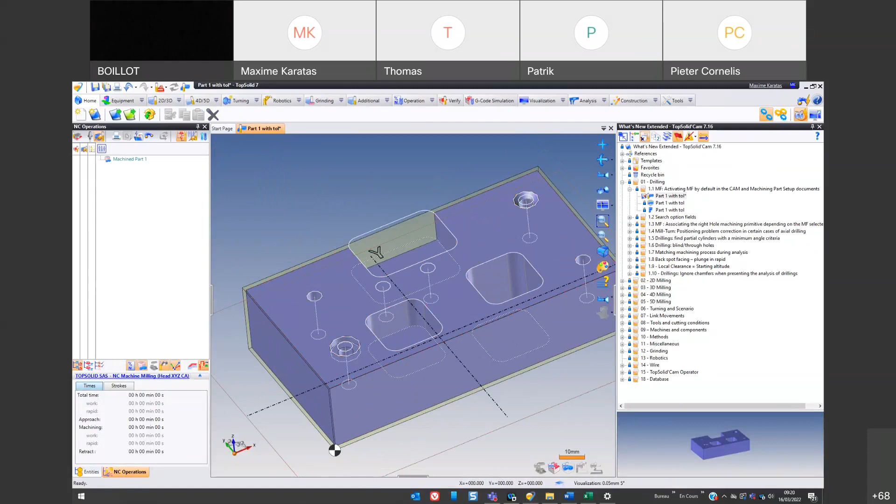Okay, let's go next. Search option field. Okay, so very simple.

You can now define the default search options in the drillings. You go to tools here, options, drillings. I was there yesterday, as you can see. And here you can choose which search option will be activated by default.

Just in case the question pops up, I can't remember if we included this here. I don't believe it, I don't think so. Trailing analysis, no, we don't have it here. So yeah, it's only in the options here in tool options. Simple as that.

Next one, there we go. A manufacturing feature and drillings associating the right hole machining primitive depending on the MF selected part. Okay, so what is this about?

It's very simple. Let's go to this example 1.3 here. Okay, and what are we trying? When you select one of the MF from 7.16, when you do this, okay, so maybe I need to be a bit more attentive.

Okay, when you select the right MF here directly, and you choose drilling and hole machining, the right primitive should be associated instantly, which is not the case here. Let's try this one here, drillings, hole machining. Okay, so you see I selected the spot facing and I don't have to select it anymore. The drilling primitive will include it automatically.

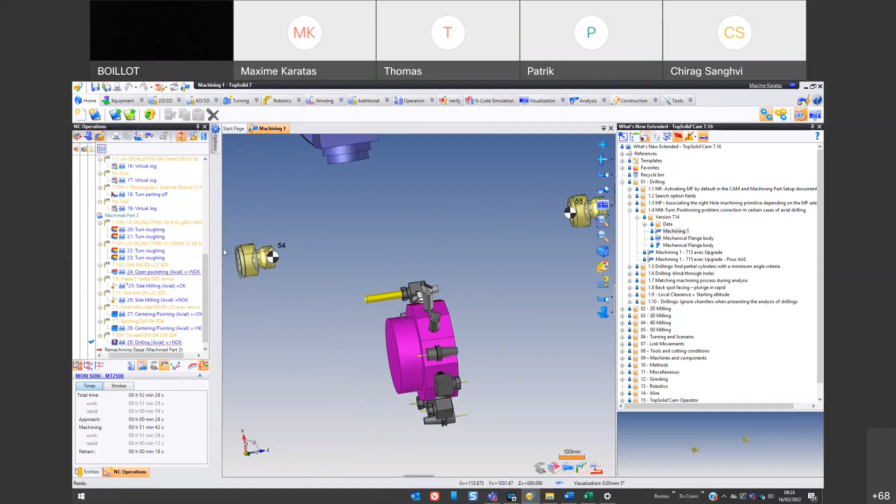Here, let's show this, we have a 7.14 example here. So when you had mill-turn machines, or for example, turrets working on the bottom side of the axis, sometimes working with drillings, or I don't know, like a G12 or something like that, sometimes the simulation will display the axis working on the other side, which would result in problems. For example, here we have this open pocketing, I believe on this turret. So let's simulate and you will see.

Let's go. Okay, here we have this, and this is the top turret, and we are actually trying to work under the axis, which is not optimal. Ideally, we would like to work here, right? Makes a bit more sense.

Technically this has been patched, and there were some cases for drillings where this wouldn't still be the case even in 7.15. So we just upgraded that algorithm, so you shouldn't get this problem anymore. For example here, so I believe this one was patched. Simulate, okay.

So you would get this behavior by default, and now this is patched. So this is the default behavior, and you don't have to put the option in the shift angle in the multi-axis settings. I believe it's somewhere.

Okay, let's just check it out. So here, and shift angle. So technically, I didn't check it out, but on 7.14, you should have had to put a 180 angle here to get the right result. This is no more the case. Now, if we're using a top turret, we are working on the top side of the axis. Simple as this, next.

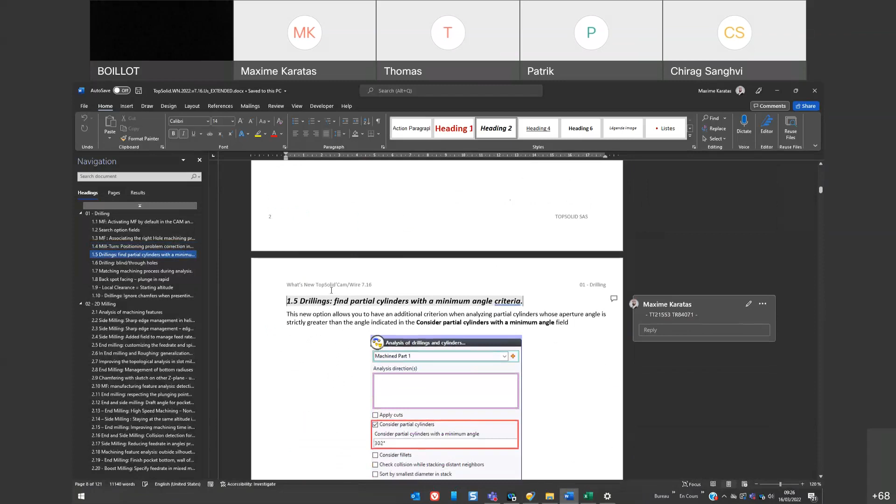This one was tagged as an important point from product management. Let's take a quick look at what it is about. So we are now about to filter partial cylinders with a minimum angle criteria in the analysis of drillings and cylinders. How does this work? Very simple, we just start an analysis of drillings and cylinders here.

Okay, thank you TopSolid. And in there, in the options, you can ask to filter and consider partial cylinders above a certain angle. So for example, if we put 250 here and then redo the search of drilling, and I select everything, you will see that...

Every angle under 250 will be excluded. So let's try it out here. We have 270. So if we put, for example, 280, again search, and you see these ones have been excluded. So it makes it a bit easier to apply certain kinds of methods and stuff on these partial cylinders and all. Simple as this.

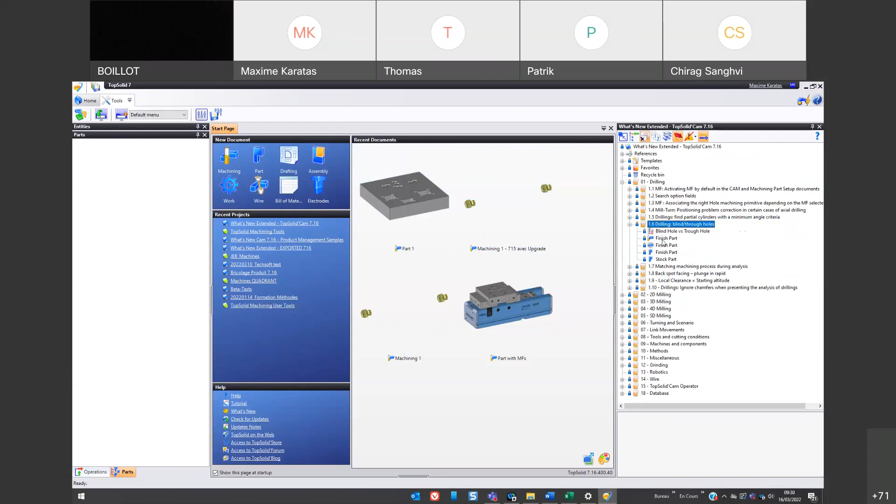Next one. Okay, a new filter option, call it like you want, about how we consider blind and through holes. So we added a new parameter in the options of analysis. Let's check it out. If we go to options in the CAM analysis here, we have this new checkbox here called check blind hole as through hole.

And what it does is that, when doing the analysis of cylinders, for holes that are through, if you have some material here, TopSolid would consider them as blind in the past, or in any case. If you have material here, it is considered as blind. We introduced this parameter here so that you can decide from which amount of space you want between the end of your cylinder and the bottom of the next face, to consider that this cylinder is actually through.

So if we put 20 millimeters here, for example, and we start an analysis of cylinder, we take this one here, I click drilling, hole machining, you see you get over depth 0 here, so it is considered as blind. And if we take the last example here, hole machining, you get through hole over depth, which will be different. Okay, so think of it.

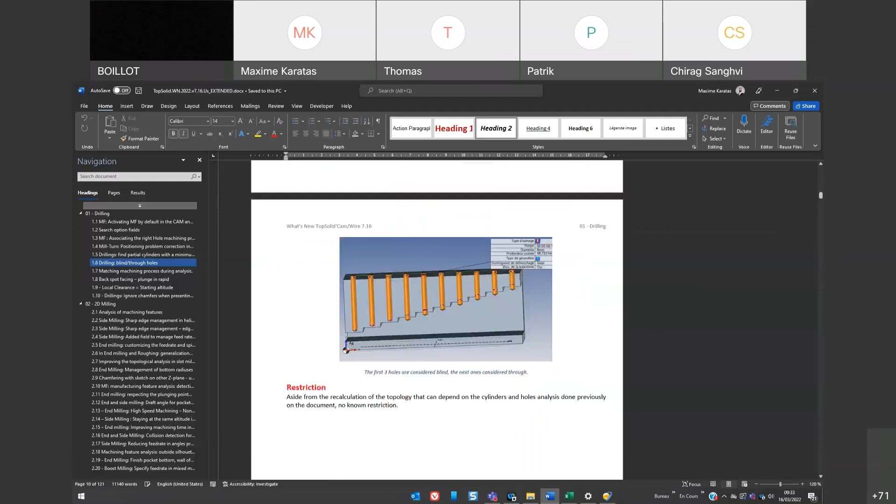So let's proceed. 1.7, matching the machining process during analysis. So what is this about? So the thing is, there we go. So now, again, a new option inside the options and analysis. We have this window or checkbox to take the machining process into the calculation, to consider the machining process. I don't like the translation, but it's fine.

Let's go here, CAM analysis. And we have, where is it? Here, take into account the machining process here. And we can keep it here, or we can put it in the options. So what is this about?

If you take a quick look here on the part, we have 4 cylinders that look, geometrically and topologically speaking, the same. But if we take a look at the operations, you will see these drillings have been made differently. Here we have a drilling with the spot facing already done, here it's a drilling, same drilling here, then we add a hole here. So the way we create these holes is not exactly the same, so the process is different.

From now on, when you do this kind of analysis, we simply start the analysis of drilling and cylinders. So now instead of grouping these cylinders together, the different processes have been taken into account, meaning we consider all the processes. Since the color and the process are absolutely different, we separate them into 2 different groups of drillings, as you can see.

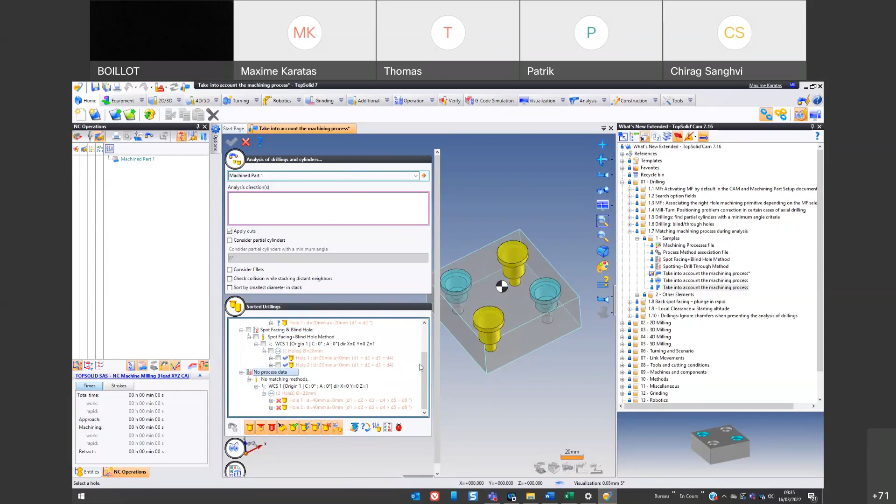Just a quick reminder how to do this. You have to use 2 different kinds of files. You have to use a machining process file, which is used during the CAD process, where you define 2 processes. Then you need a process and method association file, meaning from here you will have your process association, and you select which method is supposed to be applied inside the machining process. This is where you can define different things. I'll let you explore, but for now let's proceed, and if you have any questions, please give us feedback.

1.8, back spot facing plunge in rapid. Let's take a quick look, because simply put, we can now define if we want to use a rapid plunge inside a back spot facing. This one here is a good example, let's show it. You can now go here, I believe it's in the parameters. So for the entry feed rate, you can now say you want to do it in rapid, and you'll see it changes instantly. Simple as this. Again, here, settings and parameters, you have both entry and exit feed rate, where you can choose which kind of feed you want to use.

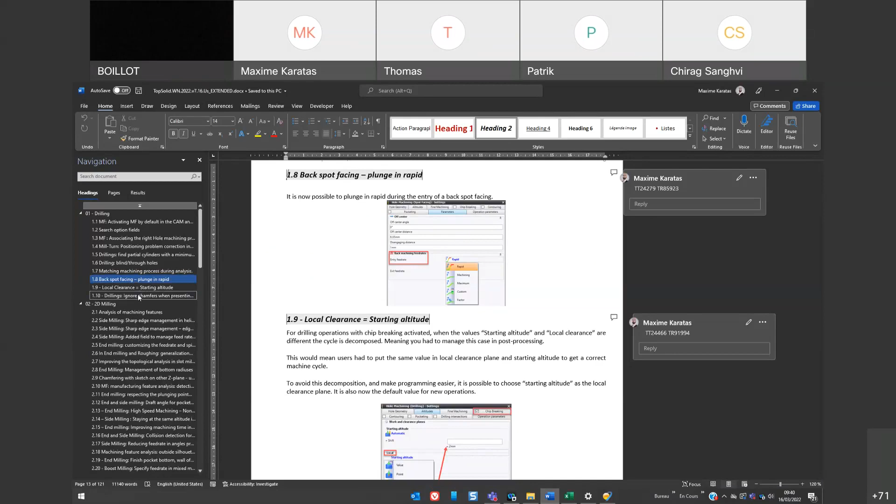1.10 drillings. We are now able to ignore the chamfers when presenting the analysis of drillings. Right click, analysis of drillings and cylinders, right click. So these cylinders, if you ignore the chamfers, they are all the same, but you can now request TopSolid to completely ignore the chamfers, etc. I tried this yesterday and had a problem, but let's go, inside the geometry you can ignore chamfers and fillets. Let's try it out. Not today, it seems, because I believe I did it before. This is the result you're supposed to get, but since the last patch we had some problems. I believe it's already issued as a fix, but you should be able to ignore chamfers and fillets and have everything grouped together. Let's proceed, and I'll make sure it's patched.

Next one, so we are done with drillings in general. If there's a quick question we can try, but let's switch to 2D millings.

Okay, let's go. 2D milling. So as you can see, we have a lot here. So let's try to not lose focus.

Analysis of machining features. Let's go. So simply put, we have 2 new filters that have been added. Let's take a quick example here. For very complex parts such as this one, right click. Okay, not sure why it's so slow this morning. No, absolutely not. Okay, so let him do these things.

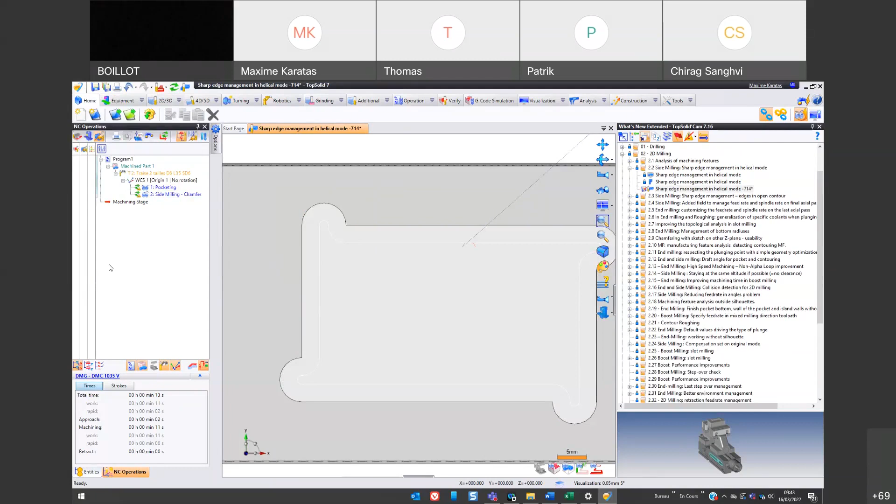Okay, if you now upgrade to 7.16, okay, so you see that we need to recalculate, Control E, there we go. And in this case here, for chamfers, we now get a good result, okay, which is literally breaking the edge, okay. And just as a reminder, it is in the angle management, and here you can ask what you want to do exactly.

Okay, clear, I believe. And I even sent some extreme cases I found myself, and they are all patched. So if you find more cases where this wouldn't work, okay, so remember when doing contouring and breaking angle in helical mode only, so it's not in the general mode, here you would get some strange behaviors. Okay, next then.

Breaking edge in open contour, yes. So in previous versions, when you were doing some side milling and using, I believe this was, this primitive, so the contouring primitive, the most standard one, you wouldn't be able to break the edges at the entry or the lead-in of a profile. Okay, so this is now possible. Okay, and in the lead in out section, what was that?

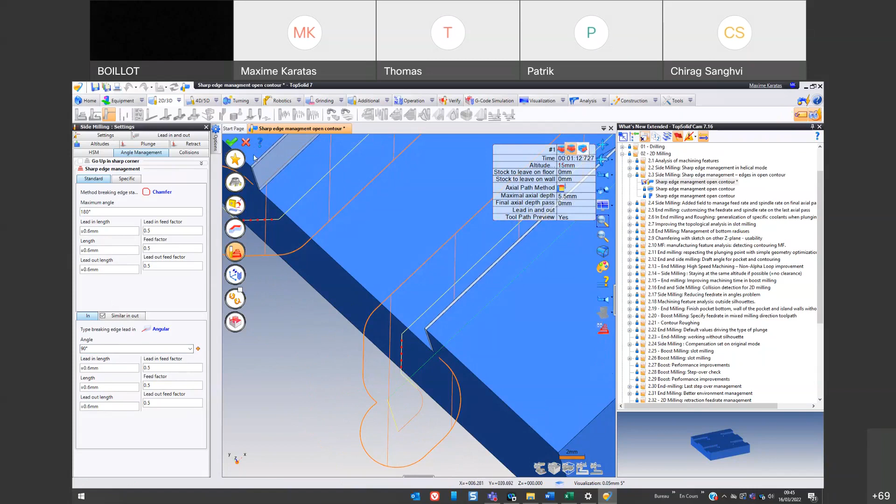Previously, this would work only with the truncated contouring, I believe. Okay, so now it has been generalized, and you can do it on all the profiles with only one cycle. So no more drawing sketches and stuff.

Okay, let me just take some notes here. Okay, so 2.4 and 2.5. So side milling added field to manage feed rate. Okay, so these are mostly the same thing, but let's check it out.

So now in pocketing and side milling, when you go here, so here it's the side milling example, we can manage the feed rate, or well, we can manage some things for the feed rate on the final pass. Here, so if you have a final axial depth pass here, you can also choose what you will do for the feed rate and the spindle rate here.

Let's open up this window, and of course you can choose between a specific, well, you can choose the machining, the same as the, yeah, well, you can choose the same feed as the rest of the machining, or you can use a custom one or a factor of the feed rate you specified in cutting conditions. Okay, same thing for the spindle rate, okay, custom one, tool factor, etc. Okay, so this has been done in side milling, and I believe this is the same thing in end milling.

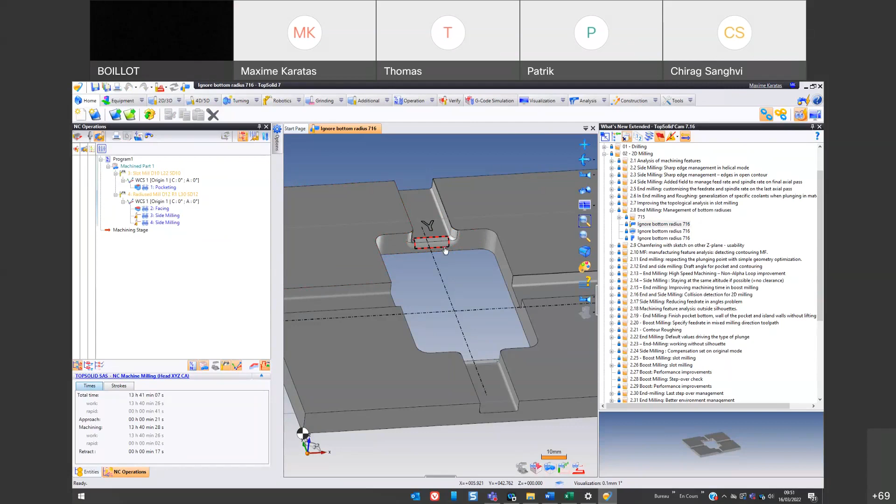In the past, if we wanted to ignore the bottom radius, it is in the settings here - ignore the bottom radius. When you would check this, in some cases the management of the finish shape would just break and not work at all. This has been patched. It is now working. You can now click this and get a correct machining.

This has been patched in any case - end milling, side milling, etc. This should work correctly from now on. Just play with it, and if you find cases where it looks like it's not working when it should, you can always send some stuff.

Yeah, I believe I made a screenshot on this. So 2.8, I believe. Yeah, here. So I made a screenshot. This was the kind of things you would get in 7.15.

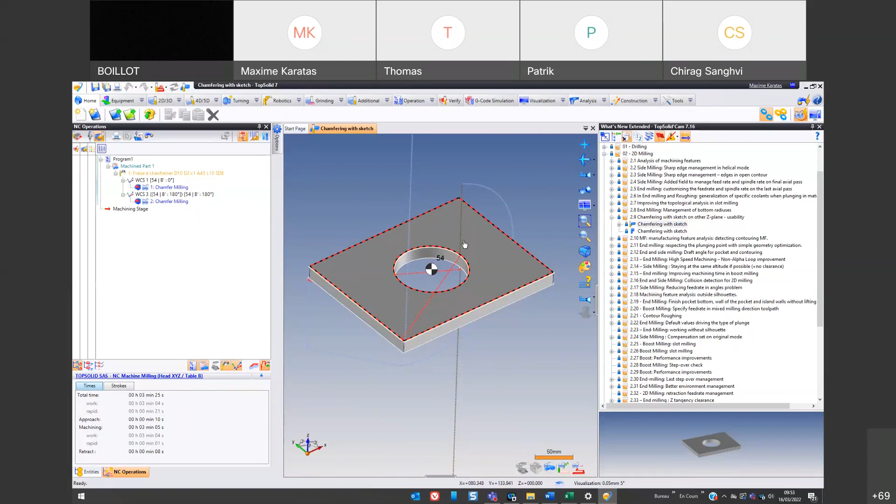Okay, I'm getting back to this. We changed the behavior of the chamfer milling. As you might already know, in the geometry, when using a sketch profile, you can change the altitude where you want to use the profile. You go on your geometry, then click on this range, and you can choose to which value you want to use the altitude of the sketch.

For the chamfer milling, what did I do? For chamfer milling, when using this on the bottom, this would lead to strange things, so this just wouldn't work. And when using a different work coordinate system - this is a very specific topic, but we patched it when using a different WCS.

You can now do this, and you don't have to tweak the positioning anymore. The positioning should work by itself. If you had cases where you would have to play with the position to adjust what was going on with the altitudes, from 7.16 you shouldn't have to do that anymore. If you don't know what I'm talking about, it is very likely you didn't get this case, so you won't get it anymore anyway. Okay, I'm moving on.

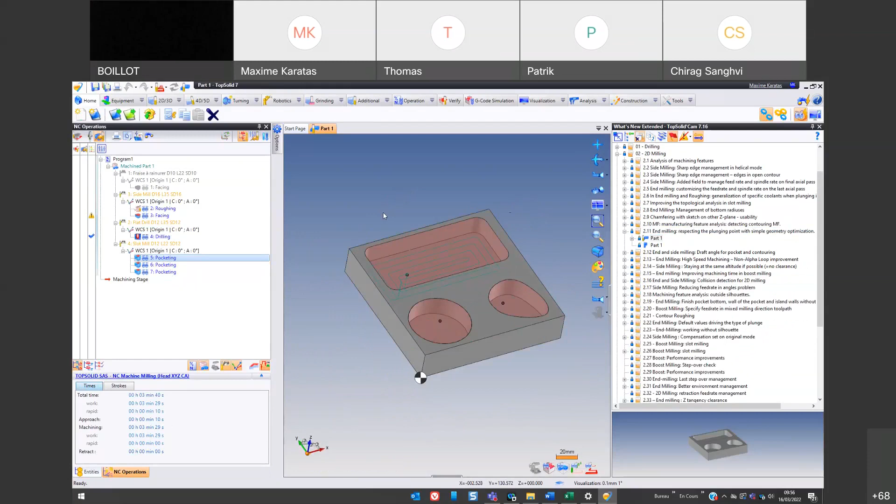So in some cases of pocketing, especially in 4-axis or stuff like that, when we used the simple geometry optimization - I believe it's in the strategy here - when you activate this, sometimes it would just break the plunging point you would choose. In the lead-in section or plunging point on your label, when using the simple geometry optimization, it would break everything and wouldn't use the point. From now on, the point will be respected: we plunge and then join the first point of the simple geometry optimization, so we try to reach the profile that was calculated. So this has been patched correctly. Let's proceed.

End and side milling draft angle for pocket and contouring. So, simple one. When you are in pocketing or side milling, this would work the same way. You will find here in the settings, for the stock to leave on wall, let's bring that up. You can now choose how you want to calculate the stock to leave on the wall shift: use a value or an angle. Let's put an angle, for example, 10 degrees. Let's confirm.

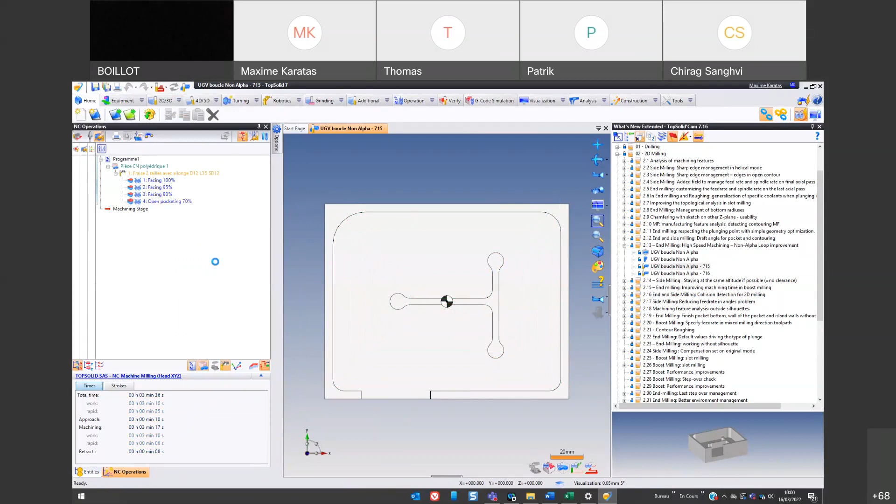Let's upgrade and rebuild, and we should get some improvement. As you can see here, the loops have been greatly improved. Instead of doing a complete loop, we can do this kind of corner correction here. So this will look a bit better from now on. We have a general better management of alpha loops in this version.

Let's not save this so we can keep the history.

Let's proceed. Side milling, staying at the same altitude if possible - the fact is, let's not do a clearance when switching passes. So what is it about? From now on, we are able to request TopSolid to stay more or less at the same altitude, meaning that we want to not do a clearance when switching from one pass to another.

See this little maximum feed rate move we have here - we can now request it in some of the cases. Plus we have options to filter the cases where you want to actually do a clearance. I believe it's in the HSM here, you need to request this first. And here you have to select a minimum length from which you actually want to go to the clearance. So here, 20 millimeters - if there is a distance greater than 20 millimeters from here to here, we get this clearance. Let's try to play with it for a second.

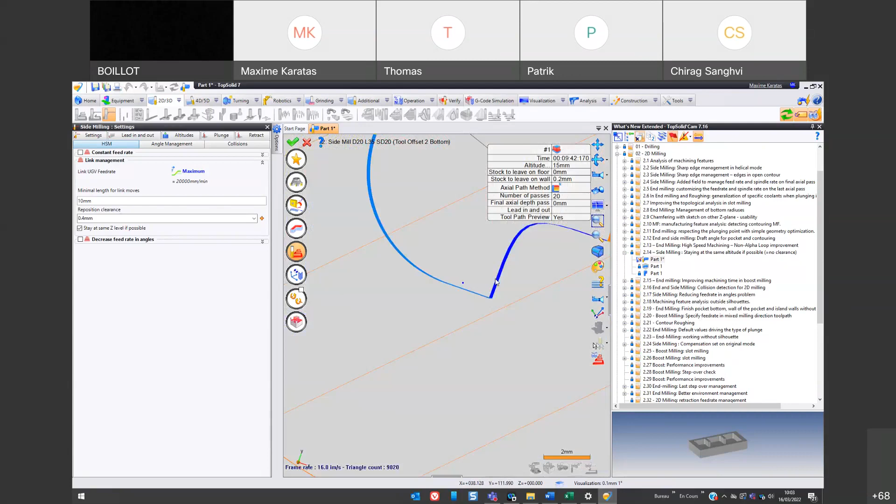Okay, so heard you for the maximal length instead of minimal. We'll try to discuss that. I believe this is what they use in French. As for changing this little movement here, it has absolutely no regard or anything to do with the link movement, but I will give you the trick to change that.

It is because in the settings, I believe it's here, in the compensation diameter, we use this offset to manage the case where we use the exact diameter of the tool. So if you actually get rid of this value here, there we go, you get this smooth toolpath. So from here, switch to maximum feed rate and go to the next pass, etc. This is because of the compensation movement we do here. So just get rid of a little epsilon here and you should get a very good result.

I believe this was written in the documentation. What was it? 2 point... I'm lost. 2.14, yeah, so that's it. Staying at the same altitude, and I believe, yeah, I did it here. So, okay, so think of it.

Let's proceed. Okay, so very simple one, no need to explain. Okay, 2.15.

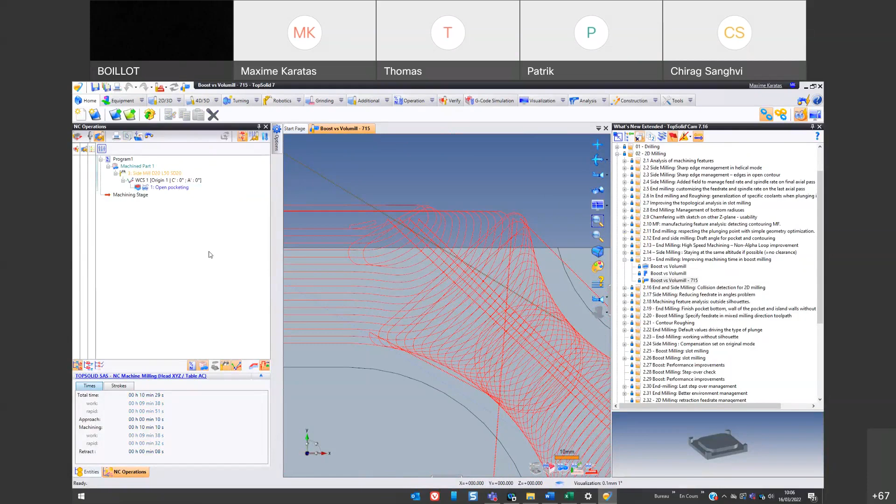So we just improved some performance of the boost algorithm compared to Volumill. I won't get too much into the detail of what was done - I'm not even sure I'm supposed to tell, but let's be fair: we improved the way we do transition links when, for example, using open pockets and stuff like that. Every transition link has been reworked, so you should get smoother results and, well, smaller results, meaning the cycle time should generally decrease. Okay, so nothing more to say, to be fair.

Okay, so here, let's close it. You can try it out. So if you have a boost you want to try, time to try it out and see if you get a performance improvement.

2.16, end and side milling collision detection for 2D milling. Okay, simply put, we are now able to request this in your cycle. So you see, if you do some pocketing without managing the tool holder, it is now possible to request it. And as you can see, we will use a diameter calculation for each path where we will change the way we offset the path, to take into account the fact that we are using a tool holder.

Okay, where is this? Double click on the pocket. Okay, we go to the settings. Why is it so slow? Am I in? I don't know what is going on. But it's okay, let's just wait. It's not supposed to be slow like that. Not sure if I am in energy saving mode or something.

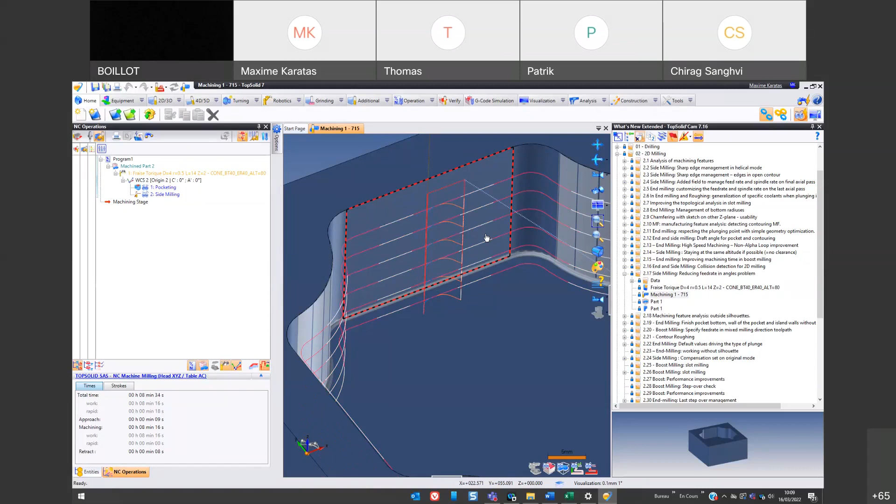I believe I made this kind of capture - well, I made a screenshot of this. Yeah. Okay. So you should get a better result. This also means, of course, that files with this decreased feed rate in lead in out will be modified.

So be careful with these. Okay, so I believe you might want to inform your customer sometimes.

Okay, 2.18, machining feature analysis outside silhouette, meaning what is going on? I believe that when you create or use... when you do machine feature analysis and you put an analysis direction, you should get one more.

You will get this outside feature - well, this isn't the right word, it's a contour, but you should get a new feature analyzed when you output a direction. This is the same manufacturing feature, it will work just the same as we did here. I believe it's a contouring MF.

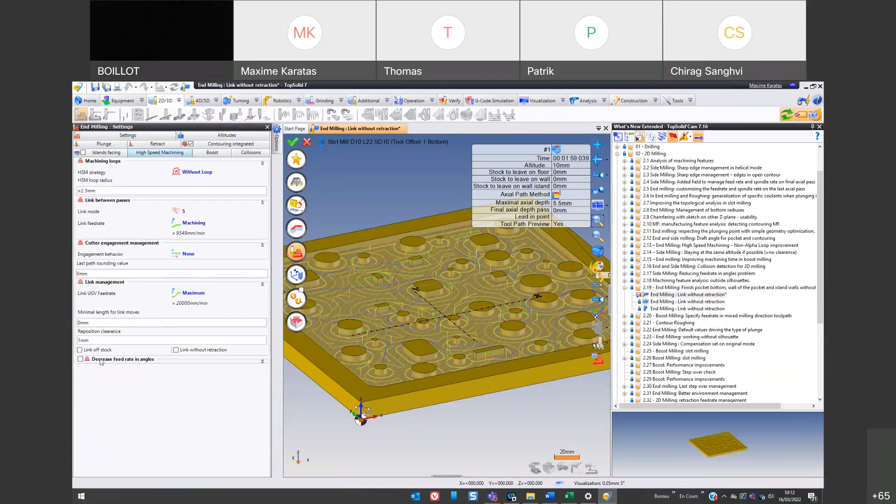Link without retraction. So, in pocketing and milling, when you finish your pocket, in some cases, with some materials, you don't want to lift the tool when you are at the bottom. So when going from a zone to another, you want to request TopSolid to stay at the bottom as much as possible. I believe it's in the settings, in high-speed machining. And here, if I request link without retraction, you can see this behavior: instead of doing a clearance from a part to another, TopSolid will stay at the bottom. So in some cases, it could be very important.

This feature will be combined with another one to help manage the case where you want to machine a zone and finish it at the same time, without lifting the tool. This can be very important for some kinds of plastics and also very precise electronics and stuff like that - this has been requested. We'll talk about it a bit more later because we use link without retraction plus a new option to do island contouring a bit later. So think of it if you don't want to lift your tool.

Boost milling, specify the feed rate in mixed milling direction. So what is this about? Simply put, when you use mixed directions - both conventional and climb - if you go into the strategy here, you can request to use the mixed milling direction. And when you do that...

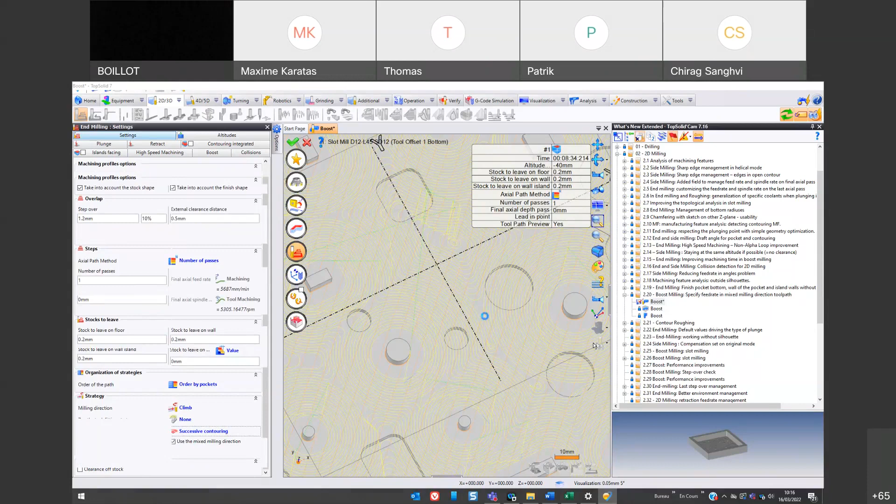That is a strange way to put an example - yeah, okay, I know, that is a strange way to put an example here without putting it in the boost. There we go, and yes, you are right, we are getting our parameter back. I will save this document like this so you don't end up making the same mistake as I did here.

Yes, I know. When you want TopSolid - okay, am I in energy saving mode? Just a second. Okay, what are you doing? Let me just change the energy mode because it's not normal, it's so slow this morning. Okay, fair enough, let's keep it like this.

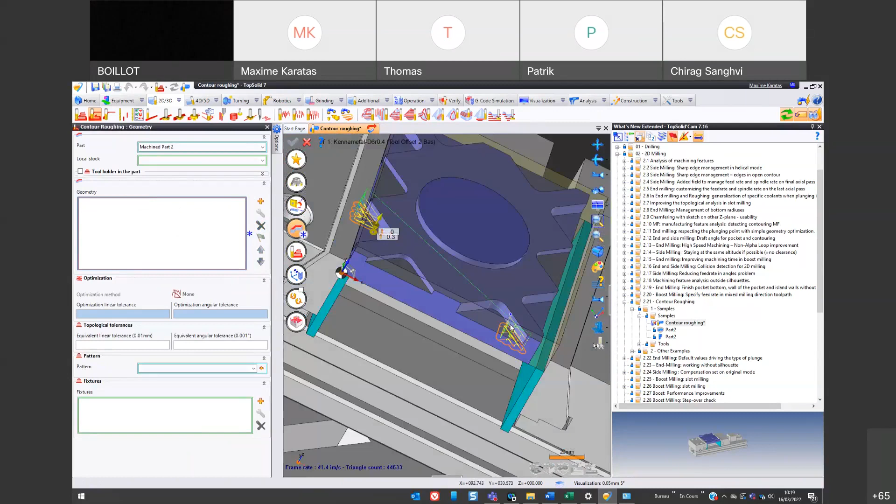This is what I call the demo effect. Alt again, and then going here, I don't know. Okay, so the Alt behavior should be working, not sure why it isn't here. Let me just try it out here, from here to, or I don't know.

This is why I'm trying it outside the operation. It should work inside too, this is why I believe. Better. Okay. So good, yeah it should. I know. Hasn't this been requested already?

Okay, so well, now it's your time to play with it, I believe. But basically it's the same as end milling. This has been tagged as important, as you might guess, since it is a new cycle. We made a complete video with translation that will be available on the e-learning platform, and it's also included in the package I sent yesterday.

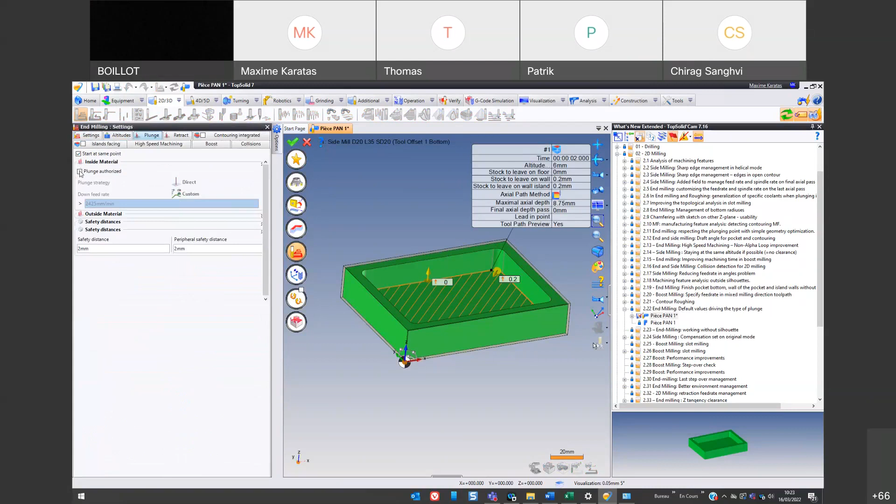So here, for example, I get a message: plunge is prohibited in the material. And since I'm using a side mill here, so double click, the user has to actually put the plunge here. So generally speaking, we improved the cases where the user wouldn't get why he's not getting any kind of toolpath. And here, of course, if we force the plunge with a tool that hasn't center cutting, we still get a message - we get toolpath, but we get a different message: the plunge has been allowed with a tool without center cutting. Yes, this will avoid support a lot, a lot.

Okay, so next one is a bit of an odd one. We don't have any example on this because the example here was confidential. So what is it about? We are not able to request TopSolid to work without using the silhouette. You know, the silhouette is the outside curve you get when you start a new cycle.

You get this orange cycle here, the silhouette. Let's put it there just in case some of you aren't sure. So this is the silhouette, okay, this orange thingy we get here. So for a very specific case, we allowed the fact that we can work without the silhouette. But let's be fair, okay - you have to be very sure what you are doing when you activate this option. This is for very specific needs, because yeah, we have a set of instructions to use.

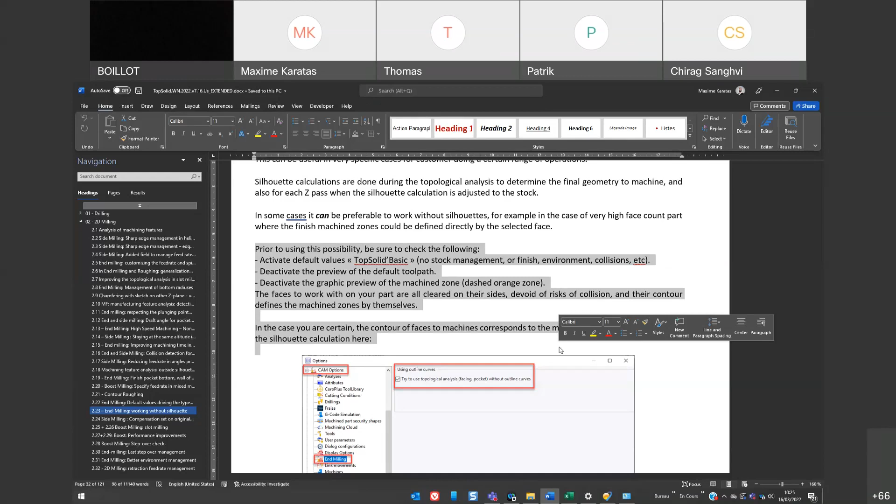Yeah, I don't like the silhouette word. I need to change something here. Okay, fair enough. Let's switch to the next point because we have a lot. Okay.

We made a general rework of the compensation, set to original mode. Generally speaking, simply put, we just made the compensation work in some specific cases. I believe we put an example here, so you might want to play with it. Very specific cases of compensation not working, for example when breaking angles, linear breaking edges, and some other parameters. This would lead to problems, but this has been patched, so just try it out. Nothing less to say. Let's proceed.

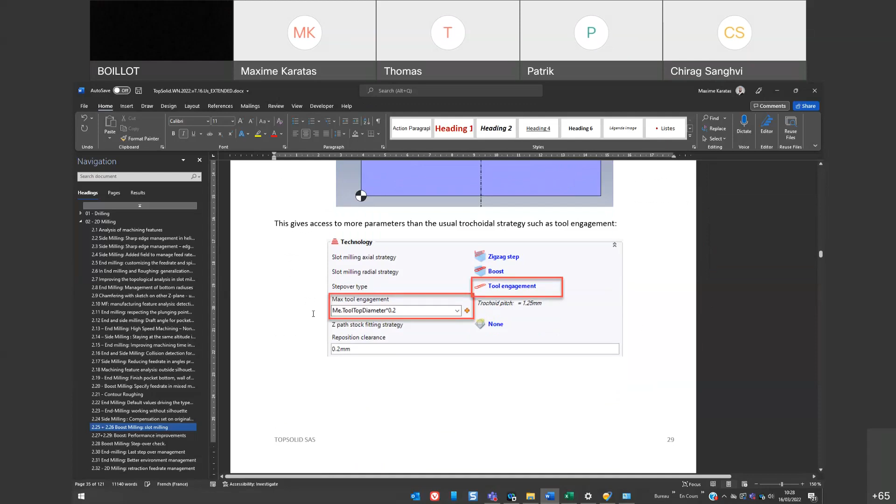Generally speaking, slot milling wasn't very usable in Boost. I believe this was usable in 7.15, but was wonky, and now it should work correctly. This will, of course, give you access to the usual parameters of Boost. So, time to play with it.

Boost performance improvement, same thing I believe. We had slot milling, so try with it. Boost performance improvement, nothing too special to say about it, so let's just try it out.

As I was saying earlier on another track here, could boost be added to T-slot milling? Please, Alexander, boost added to T-slot milling. Well, I believe this is the first.

Let me just write that: T-slot milling. Interesting, do you have the part for this customer, Alexander? Because I don't believe we had such a request, to be fair with you. If you have the part, please send it to me specifically, you can send it with the track so I can see what can be done about this. But yeah, this is I believe this is a first.

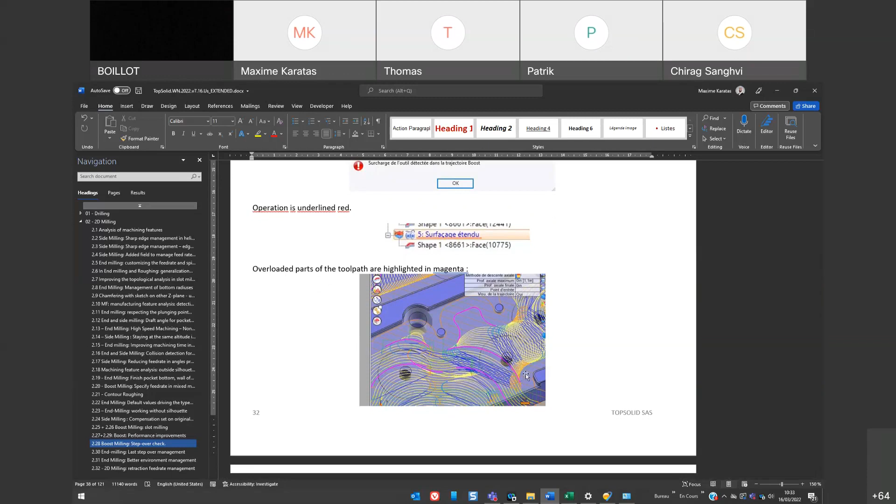Inside the boost, you have the verification, and you have four parameters where you want to check: is my tool overloaded? Depending on the amount of overload you want to check, you can select rough, standard, and fine, so you add the values. You will get, of course, a warning message saying that your toolpath is overloaded, and here we get the highlighted parts of where the toolpath has been overloaded. Generally speaking, you shouldn't get any overload, but in some cases where you have a lot of islands and stuff like that, you can get some overloads of the tool. So in case you need to check that, be sure to do a verification, and you will get these underlined to see where the overload happened.

Okay, very good. Let's proceed.

2.30, end milling last step over management. This one, we have an example here. What is going on is that here, when you go on your facing, let's take this one here, you see it going on here. When you go in the settings here, you have last step over here, it is possible to manage that, and this is what is happening here. What kind of step over you want to use? Say for example 30% here, you will see we changed the last step over. 40, etc, or 50, I don't know, and you get different kind of behavior for the last step over for your end milling operation. Simple as this.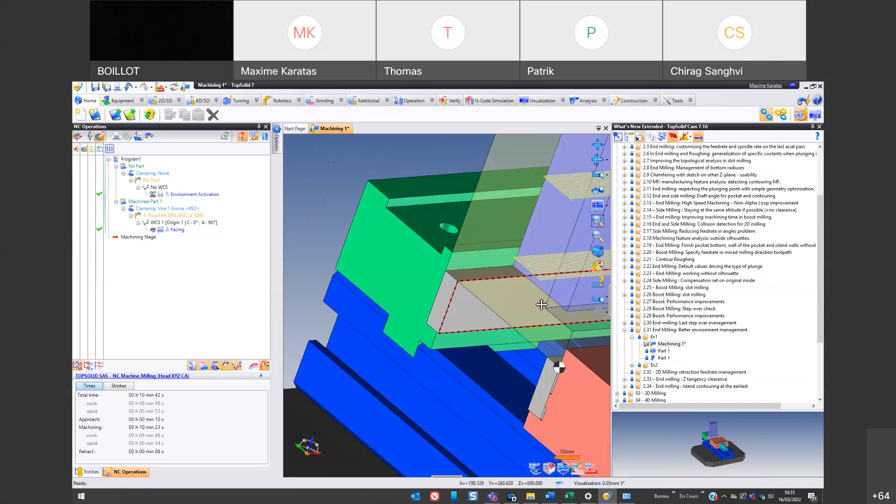Okay, so here, instead of, well, I won't go too much into the details, but you should get improvements in the general behavior when you approach the environment. So well, you get an example here, plus we have another one here. I believe this kind of things here, where you would get this kind of wonky toolpath. Instead, you should get here a better clearance. And well, I had to do it, so now you know, and you need to upgrade your document. Okay, let's go.

Retraction feed rate management. Okay, so we don't have an example, so let's just check a quick look here. Simply put, you can manually change the retraction in case of direct retract strategy. So here, when you are in end milling, retract strategy, direct, rapid, you can choose what is going on. Keep in mind, you have restrictions. Not every cycle can do that.

2.33, very simple one. I believe we have an example. Yes, we do, and I've put it right in front of us. So this is a pocket, and now it is possible to request this kind of lead out strategy, meaning we are in tangency, but in the Z with a Z retraction. Here just like that. X and Z here. So as I was saying, here,

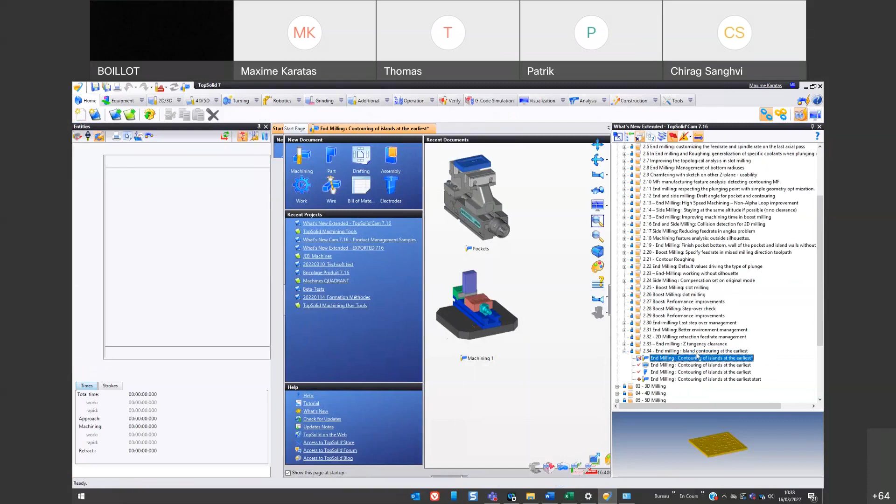2.34, end milling island contouring at the earliest. So this has been put in videos too with much more details. This has been recorded by Monsieur Benoît Lallier that you might already know. So what is this about? So this is the completion of what I was talking a bit earlier with the request to stay at the bottom of the part.

You can also combine this now with the fact that you want to contour your island at the earliest moment possible. So this is simply put into the contouring integrated, I believe. And here you can request to contour the island at the earliest. Okay, so this plus the high-speed machining and what was it? Link without retraction option here. And this should improve the general behavior in parts that tend to move or to deform while you machine, like when you liberate constraint inside the material, some parts will change the Z level.

So you need to actually stay at the bottom of your parts, plus you need to sometimes do the finishing of the sides here at the same time. So here, contouring integrated, contour the island at the earliest, and here you will progressively finish your part as you machine it instead of roughing the whole face and then do the island contouring. This will prevent the fact that when doing the island contouring at the end, you should get marks at the bottom. So this can prevent this kind of behavior. So can be very useful in some specific materials.

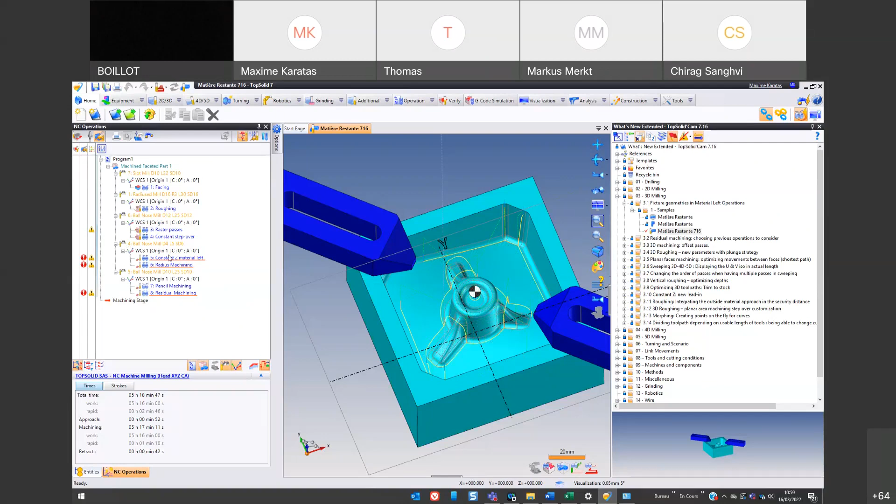Okay, there we go, opening the sample. So 3D milling, first point. This is also tagged as an important point from product management. We added fixture geometries management in the material left operations. So if you go to any kind of material left operations, such as residual machining or pencil machining, for example, let's take this one.

When you go to the geometry, here you can go into the fixture and specify the fixture shapes which you want to use. And then, of course, this will get into the calculation of the silhouette, the above silhouette, so you don't end up touching the fixture while machining. Simple as this. This should be available in previous versions too, I believe.

We didn't have this in every operation originally, and we have a list of things where it was added. I believe constant Z, material, radius, and pencil machining. I believe this is a complete list. Now I believe every residual machining operation should be able to do it.

Simple as this. You can get more detail in the specific video that will be uploaded on the platform, and you already have it in your package.

Okay, so this one, 3.2, what is it about? In the residual machining process here, for machining operations, you can now specify which operation you want to take into account before this operation, and this would change the output. But to be fair, from the last patch, I don't see it working. When I was doing the screenshots, it worked just right, so we'll just show where it is.

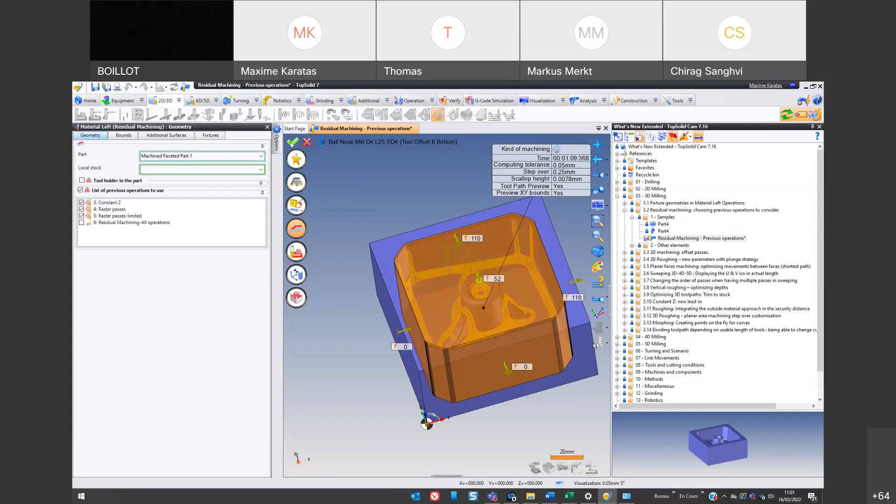So here, I believe, sadly, this is not working anymore because we are not supposed to take that much material here, and a tracker has already been issued, so we shall see where this goes. Okay, next one.

So 3.3, 3D machining offset passes. We can do multi passes in material left operations. For example, let's take again the pencil machining here. When you go to the settings here, you can request to add some offset paths. As you can see, I put 3, and you can customize that.

So let's say I want to add more - well, it doesn't mean we will add this exact number, but you can request a certain number. So let's change to 0.2, for example, confirm, and there we go. So we just made this possible, for pencil machining, radius, and material left - available for radius machining and residual machining.

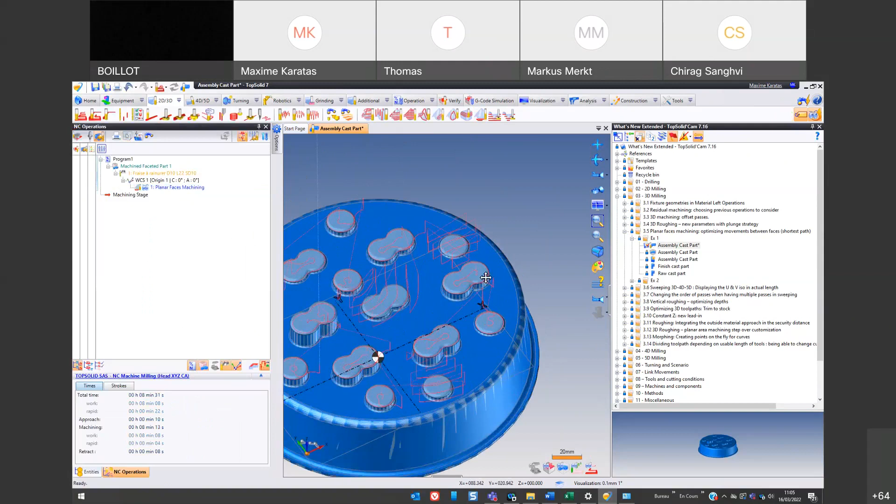Planar faces machining. We now have options to change the order we do the planar faces machining. Let's take a quick example here, double click, and inside the geometry, here you have now a new option in optimization method, called shortest path. Just like this, you can confirm, and TopSolid will try to calculate the best path to manage all the planar faces. Simple as this.

Okay. Fair enough, let's go. Let's close this.

So for this one, for the display of the UV ISO in sweeping or other strategies, when you go here, I believe it's in the geometry. When you specify the Umax, Vmin, etc., you would get the exact values of the ISO. So here 14, and if I try to change what is going on here, you see I get the exact length of this ISO here, which is covered. So this works only one way, meaning if I am moving this, I can change it, but you cannot double click on this value to specify. So it's just a display for now.

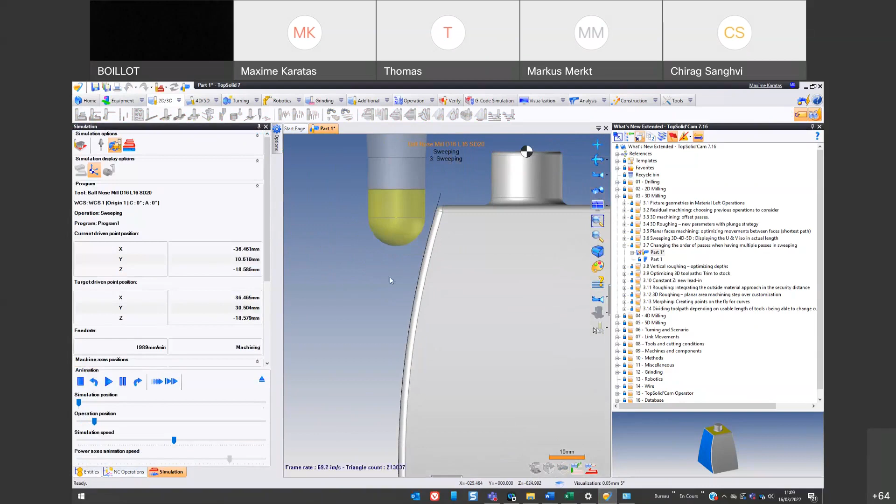Now we are able to change this. We can double click here, go to the settings, and I believe it is right here, passes order, change to radial. Let's confirm. Almost no calculation here, simulate, and here we change the pass order first. As you can see, we reach the surface, 2, 3, and we get here, instead of doing the axial movement first. Very simple, but this was requested a lot, I believe.

Okay, let's proceed.

Vertical roughing, optimizing depths. When you had some vertical roughing here, this kind of primitive, we would not optimize to the stock, and from 7.16 it is simply done, so we don't see it that much going here. With this angle of camera you can see it a bit. For example, we have a dome here, and we can use a vertical optimization of the roof. I believe it is simply put here. Just try it out and it's cool.

Okay, next point, marked as important by product management. So you get a full video with a lot of examples. I have chosen this one because it is also the same thing in 5-axis, but you will see that this will work in 3-axis too. You can now trim your toolpath to the stock. If you take this example here, you see that we have a lot of toolpath outside the stock, and now in any 3D toolpath that we have, you should be able to go here and trim to the stock. This also means that this will work in some cases for 5-axis.

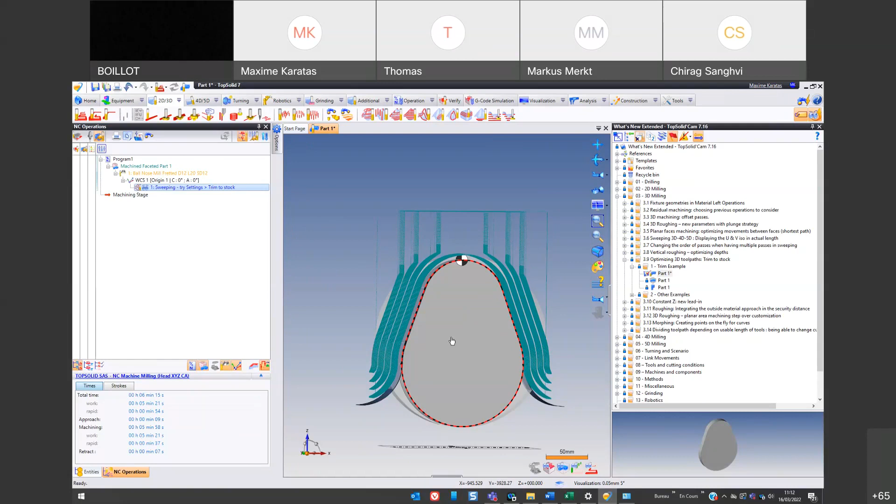Just keep in mind that there are some cases where the stock is what we call just touching, and this won't trigger. But in most cases, you should get this kind of behavior. I believe the video is about 10 minutes just on this. Let's proceed, but very cool feature, I believe.

We added a new lead-in. Simply put, this is the lead-in you see here, which is a simple tangent arc. If we take a look inside the 3D space, we can see it a bit better. We used to have only an arc with a perpendicular movement first, so now we have the simple tangent arc available. You can find it here in the plunge and retract settings, tangent arc alone, here.

If you choose the tangent one, which is the usual one, you will get the perpendicular movement here. Switching to the new one, plunge and retract, tangent arc alone. Let's confirm, and there.

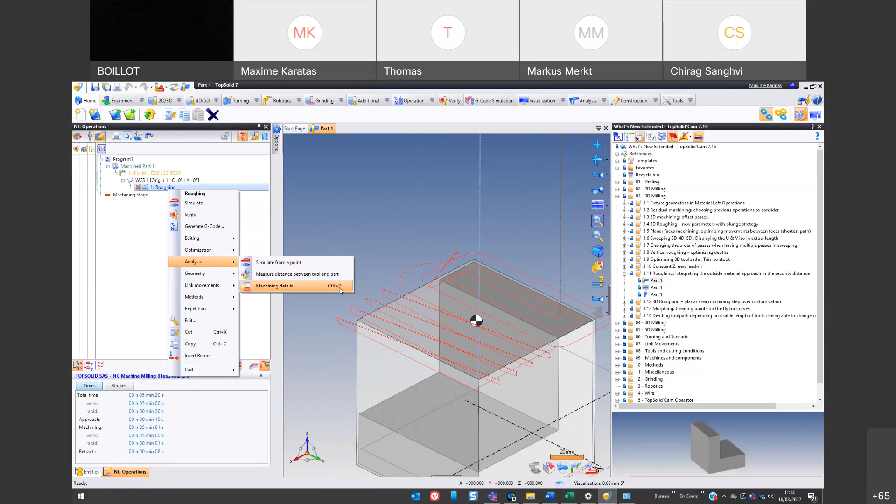So a very specific one, a bit hard to display, to be fair, but let's take a quick look at the analysis. For those who don't know, it's Control D, the machining details here. So what is going on in some roughing cycles?

The safety distances were managed a bit differently. For example, from the approach to the leading point motion here, sometimes this movement would use a different feed rate—it would use linear in most cases. So you would get incoherent movements, like this one at 100%, this one at maybe 30%, or a rapid move, all at the same approach points. This wouldn't make a lot of sense, so we just patched this, and you should get a better result here.

I believe I made some screenshots here. Where is it? I've lost it—which point was that? 3.11, if we go there. We had this here with different kinds of movement: first point was a plunge, then linear, then a plunge again. If you try to change the plunging feed rate, you would get rapid, linear, rapid, which would be a bit weird for a single plunge.

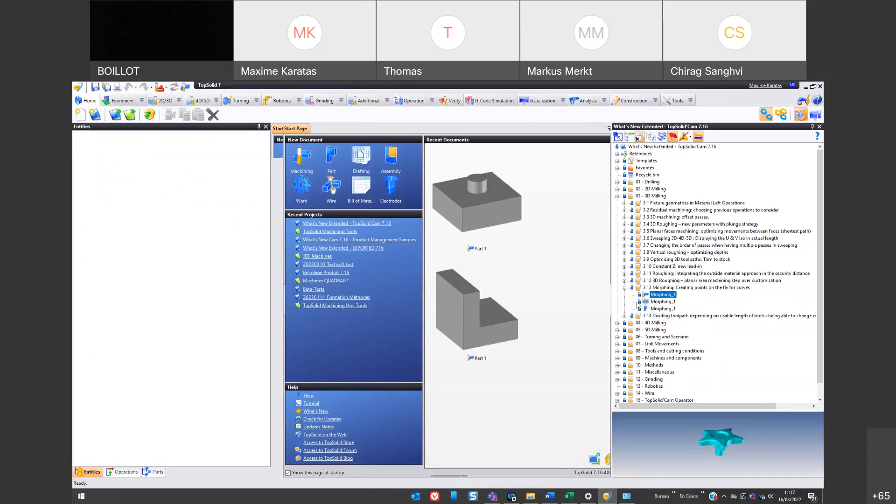Morphing, creating points on the fly for curves. Simply put, it's now possible to go into the geometry inside morphing—interesting—and here you can literally change a point and create one on the fly.

Meaning if I want to do this here, point on surface, I put it, I don't know, here, change it, confirm—without having to get outside the cycle to create a point, etc. Simple but efficient.

Okay, next one. We talk about dividing toolpath. So when you have divided your toolpaths in a roughing cycle, for different lengths of tools, you are now able to change the cutting conditions for each one of these cycles.

What is cool is that, for example, if I have cutting conditions for the second part here, same tool but different length, you get this display where you can differentiate from the first or main operation. And if you've changed it, you get a red dot that appears, showing this value has been changed from the original one.

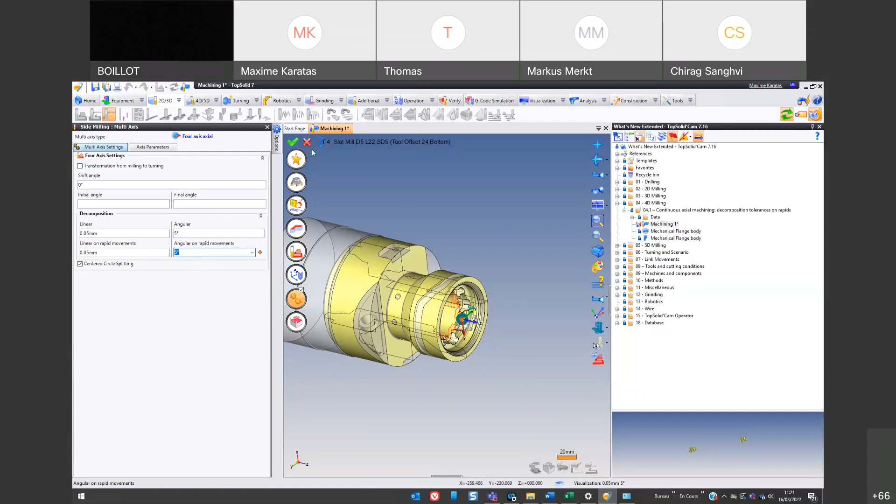If you go to the multi-axis settings here, we added the decomposition for angular and linear movements. I believe the linear was already there, but for angular movements it has been added correctly here. So you can now specify an angular decomposition, and this will split the toolpath when you output the cycle in NC code.

Now we'll switch to 5D milling. 5.1, tagged as important from the product management team. So let's see what this is about.

We just added - where was it, I believe it's in equipment - yes, here you have this new option, part security shapes, where you can specify global security shapes for a part. There you get a full new window where you can manage global security shapes. You have automatic spheres, automatic blocks, automatic cylinders, etc.

So you get different shapes, and you can specify manually yourself if you want. Say you want to specify a cylinder, just like I did here. You can say, I don't know, change it to 100, stuff like that, and then when you go to any kind of cycle, here, take this sweeping for example.

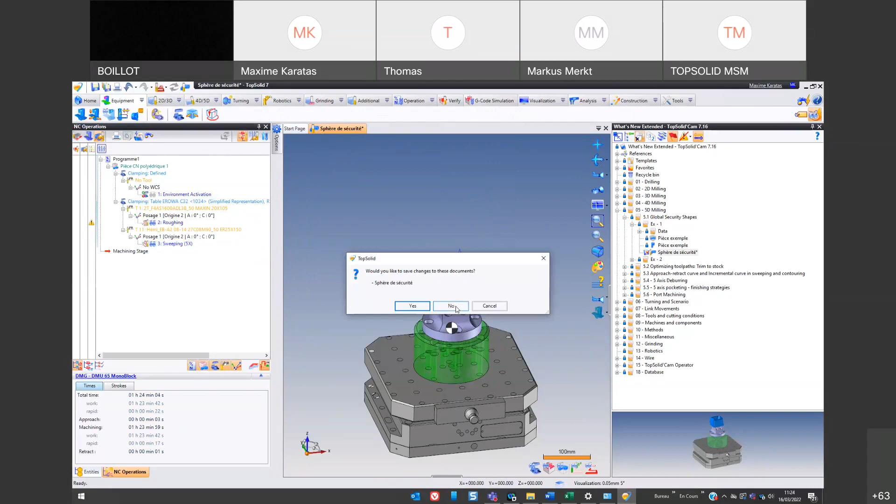So 5.2, optimizing toolpath, trim to stock. Yeah, guess what, this is the same thing we did earlier. This also works when you activate the 5-axis machine. In this case it's a very simple example, but you can note in geometry, here in the settings, you can activate the trim to stock - same point as in 3-axis.

Approach, retract, incremental curve - okay, what is this about? Simply, let's open it. In sweeping and contouring, in both cycles, it is now possible to select an approach and retract curve. I believe it's in plunge retract here, and in the lead-in section you can specify you want to use an approach retract curve and specify a sketch, a curve, or whatever.

You can also use it as an incremental curve, which would be used multiple times depending on the kind of lead-in you create. This was already here - I don't believe the approach and incremental curve was made available before. This has been tagged for 7.16.

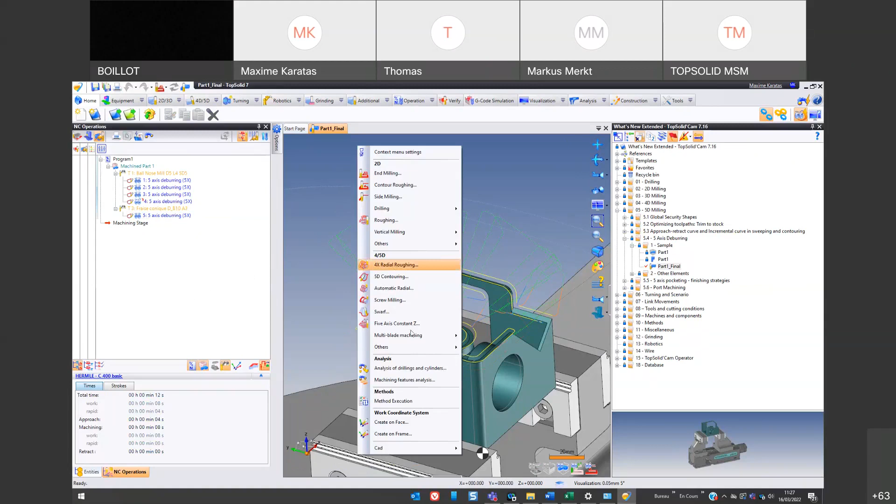A new cycle has been added recently that lets you do 5-axis deburring pretty simply. You take a 5-axis part with lots of edges you want to deburr, and you can create cycles very simply. This is a ModuleWorks cycle - it has been added, so you can find it by clicking here, in deburring.

Let's try a quick one. I haven't played a lot with it, but it's supposed to be very simple. You can specify a geometry - say you want to deburr this - or create a quick sketch if you don't have a single edge like here. Let's add this one. Don't forget to specify the tool if you can, it's better.

There we go. In there, you specify which edge you want to deburr. You can specify it manually or create an automatic selection using a vertical filter. You can specify faces you want to avoid, and then specify how you want to manage the tilting of your tool - tilting restrictions and the usual stuff we have in 5-axis.

Let's confirm to see what we get. The general cycle isn't supposed to be hard to use - just a few clicks. Let's see what we get. You might want to check the F4, and might want to change this clearance here. But the general toolpath generation isn't that hard to generate.

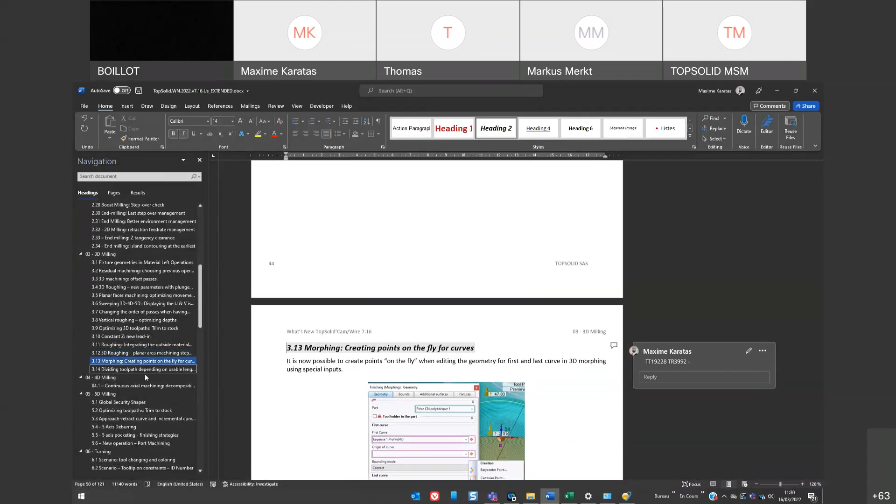I believe we put some documentation. What did I say more about it? Deburring - different supported tools. Is it a specific license? That's a good question. I didn't get any information on this. If I had some, I would have put it in the restrictions, so I need to know about this.

5.4 license specifics - just writing this down. I will try to get info, but I don't believe I have it for now. I haven't been informed of this, but since it's a ModuleWorks cycle, I do believe there should be some kind of licensing option. You might want to check on ORS for this, but I don't have the info here. I need info from product management. I'll put the question, and if I get feedback, I'll put it in the documentation. Fair enough for you, Michel?

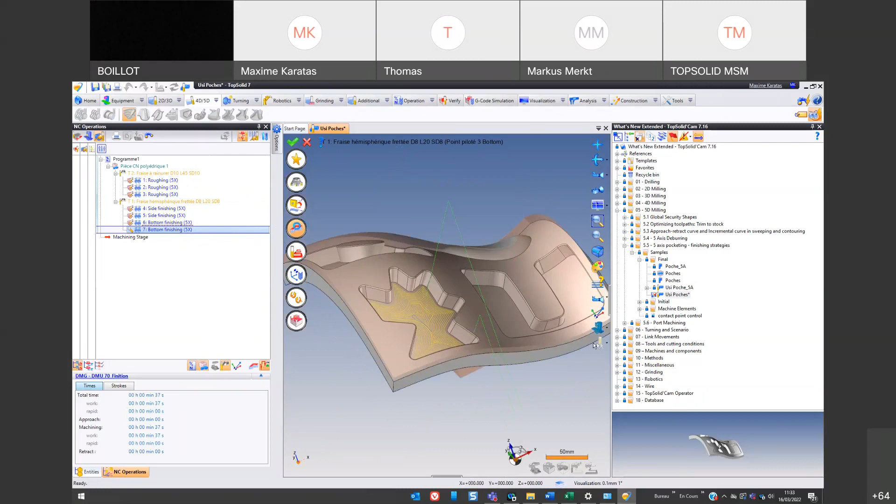Whatever - the cycle again is supposed to be easy to use. You just have to select the bottom faces, lateral faces again, and there are very few parameters to make things work. You get an offset here, how you want to work from the parallel curve, and how you want to do your cycle - one way, zigzag, etc. It works just like a pocket, to be fair. Don't forget to specify your tool and you should get results very fast.

Again, this cycle has been tagged as important, so you get a full video - I believe it's about 10 to 15 minutes of what you can do with the cycle, including what you can do on the side finishing and also cutting a specific part of this. Simple as that.

Okay, let's proceed because we still have a lot. And since we are talking about the integration of ModuleWorks cycles, we also integrated the port machining for ModuleWorks in there.

Okay, same concept. There's port machining in there, and you can specify. Let me just take the geometry from here, which would be literally this tube here. You can specify your geometry, which would be the tube. You can specify a support curve for the projection of the cycle.

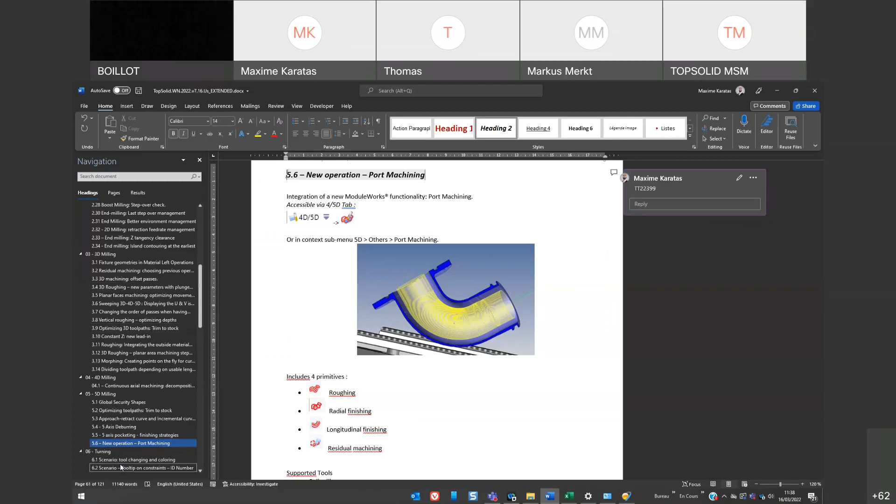So simple one in the scenario here. We added a few more information. You will see that 1, 2, 4 to about 5, those are all about the tooltip inside the scenario. Let me get my scenario back. And I want to use, where is my group mode?

Constant display. Yes. First of all, we changed the coloring of the tool changes and stuff like that. So we get this color for tool changing now.

We added new things for constraints. So if you go to a constraint here, you get a new kind of tooltip, and you get, for example, the name, the ID, what we added, the name of constraints, and the type of constraint, of course.

And also same thing for the tooltip of operations. So for 6.5, if you go to this here, you now have some information regarding the cutting conditions of the operation, as you can see, just at the bottom of this tooltip. So general improvement of the tooltips inside the scenario.

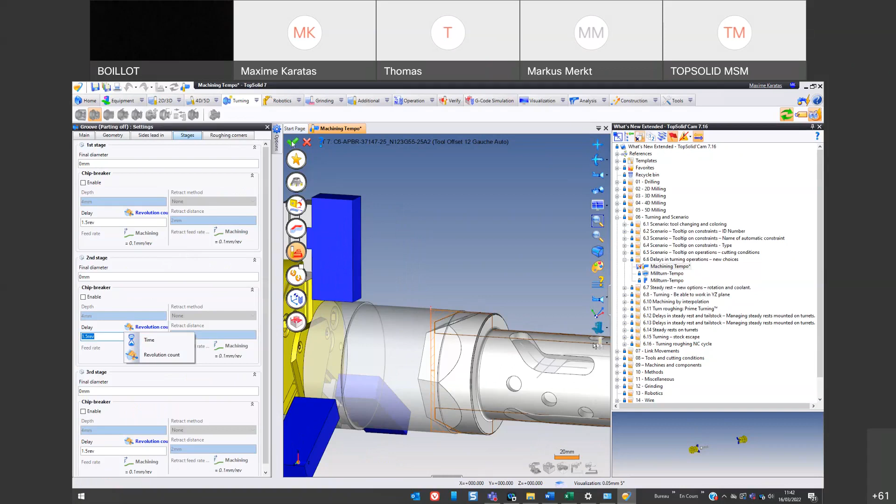Let's go. Steady rest, new options, rotation and coolant. So in the steady rest cycle, or movement cycle for steady, we added some new options. If you go to the settings, you can now specify how you want to rotate the spindle, if it's something you need. And in case this happens, you can also add coolant.

Of course, you can specify direction clockwise, but also no rotation. Fair enough. Okay, simple one.

Let's go here. This one is of course tagged as important, so think of it, turning and being able to work in the YZ plane. Why is it important? Well, to be fair, you might have heard of specific tools, from Sandvik for example, where you can do a cutoff using the y-axis, or I believe it was Ceratizit, something like that, they make a tool called Free Turn or something like that.

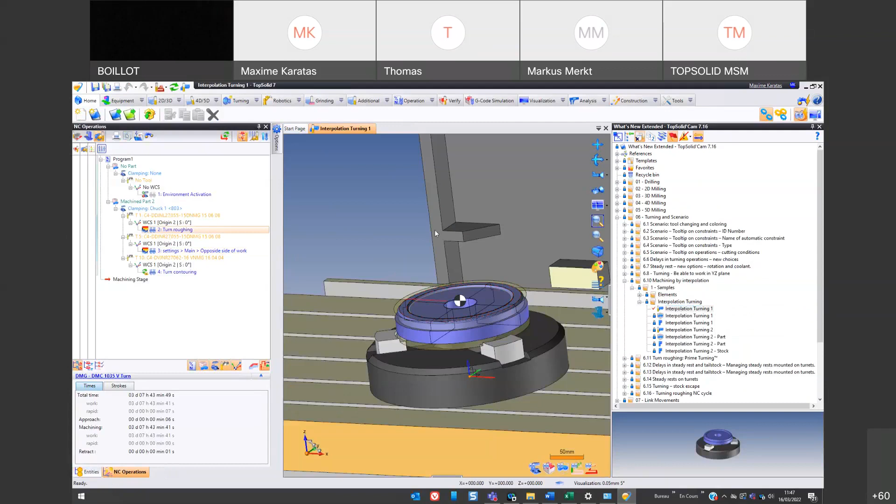Let's proceed. So number 6.9, this has been removed, and I don't even know what it is. So, machining by interpolation. Let's go on, so what is this about? So again, using the indexation of the spindle, but this time on milling machines.

So what do we do? When we go inside our turn roughing here on this machine, you can click here and in the multi-axis type, choose to do some interpolation turning. Okay, from here, when this is done, well, pretty much what you'd expect: the toolpath wrapped on the part.

What can I do with that? Well, simply put, it is a turning cycle. Let's do a quick simulation to see what we do. And in there, as you can expect, the indexation will change as the cycle progresses, just like you would do in some cases on boring machines, such as TOS, or using D'Andrea heads. This is the same kind of machining.

So yeah, can I create the operation from scratch? Well, I can try if you want, but I believe this is pretty simple. You can go here, or let's just, where is it here? Okay, turning, let's do this like that, I don't care. The machine must be defined as a milling and turning machine. I believe yes.

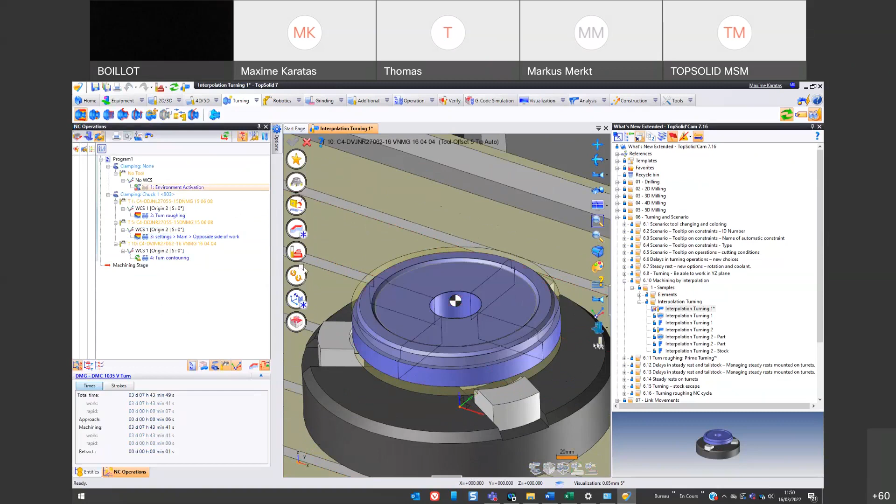Yeah, that looks like a bug to me. So let's try it out, because it should be available - you see in other cycles we don't have any problem. So whether, or maybe I'm missing something, but I don't see any explanation right now. Okay, interesting. Just to answer that and try to go to the point.

Support de broche, let's go here, and I believe this is defined here. And there, you will have to do that, of course, to specify it can do turning. And where is the indexation? I can't remember, to be fair. Oh, can I get my machine back, please?

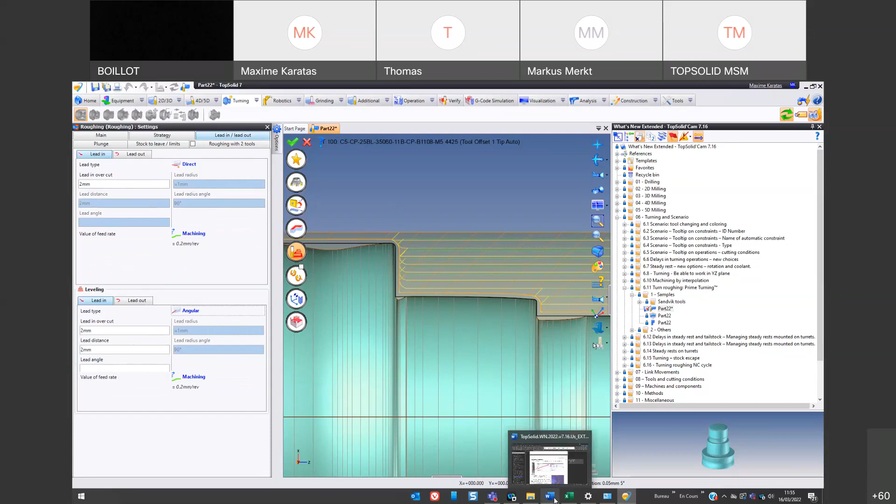Okay, I believe I made a good screenshot of this. What was it? Prime turning here. So you get the documentation here if you need to know more. Plus here, I documented that. So A, B, C, D, A, B, C, D - so what is going on inside is here, so for the leveling and for the lead out, in and outs here.

Okay, same thing, dynamic entry. Okay, and some screenshot to explain what is going on with the arcs. And here I know about the license restrictions, guys - what a surprise, you need module 4465. Okay, this time this has been documented.

Okay, let's proceed. 612 plus 13 and 14, these are all together. Let's try to explain what is going on.

We made a general improvement of the steady rest cycles and tailstock. We added a lot of stuff. Let's close this and take this example here. If we take a steady rest cycle, let's go here.

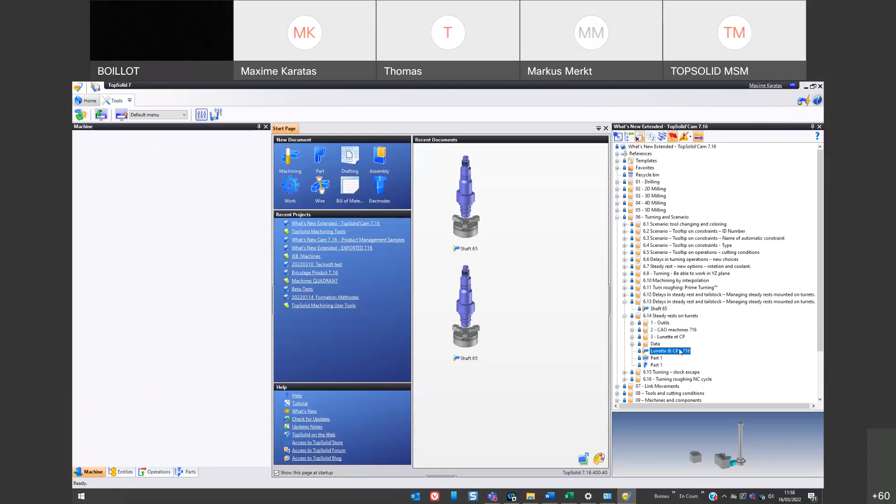Let's see, and in here this has been added. The trajectory has also been a bit corrected, because we had wonky things going on when we tried to do that. I believe. Not sure if we have previous examples on that or if it is absolutely completely new. But again, you get different retract things.

And there is also one more option appearing, to see the state. Where is it? Ah, yeah, it is this one here. So when you are changing the tool for other cycles or stuff, you want to know what is going on, or what the steady rest is supposed to do - is it open, is it closed, etc. Things like that. So improvements in general for these cycles.

So if you add files with problems from your customer, please, it is time to test them and to see where this goes. 6.15 stock escape, let's go.

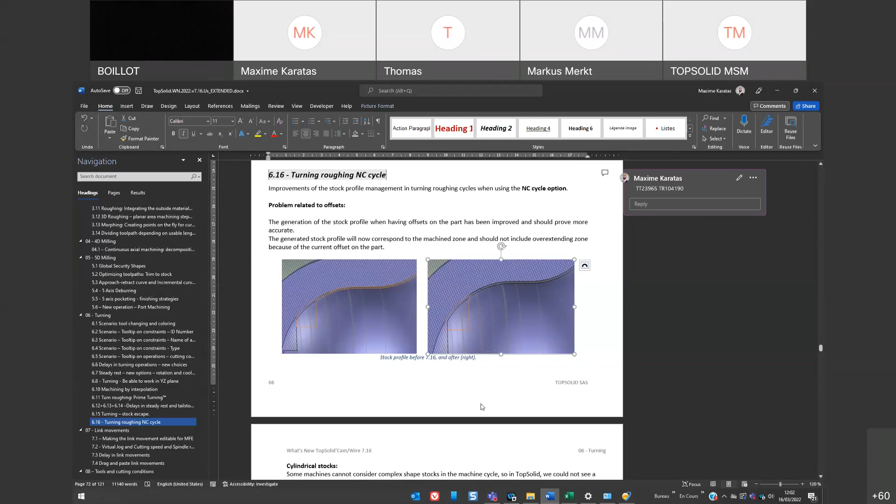Also, we added inside the NC cycle a request to send a cylindrical stock only inside the machine. I believe here, so you find it into the main section, enable and use the cylindrical stock. Since it's only an NC output problem, it's a bit hard to show, but you might want to try it out.

Okay, let's proceed. Do we have a lot more? Yeah, we do have some more, but let's try to go a bit faster. Link movements, okay, let's go here.

To be fair, when you add tools with linked tool holders, such as this case here for instance, what we call MFE - no one is able to tell me what the acronym stands for - but it is the case where this spindle here is linked to this turret here, and it moves together. In the past, you wouldn't be able to edit the link movements correctly on this kind of cycles when using, for example, the turret here.

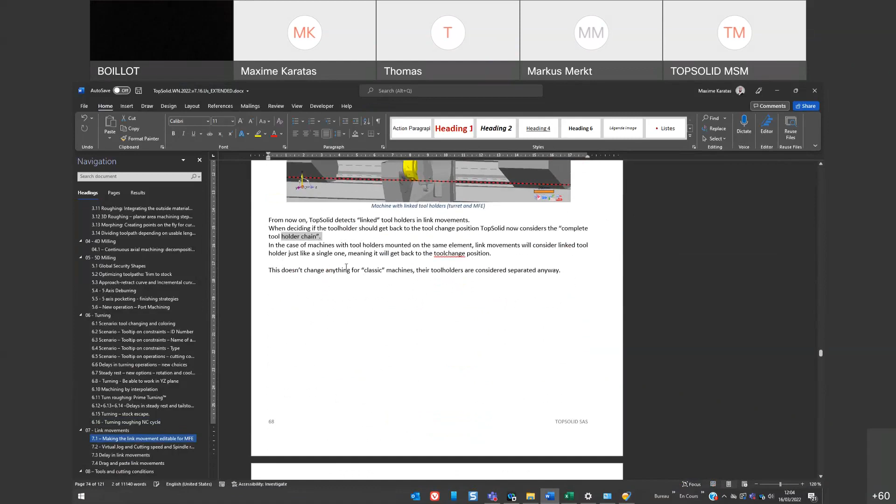Now you are able to edit the link on this specific machine. We changed the way we detect the tool holder chain. This won't change anything for classic machines in any case, but this is very specific and will improve what we do in the future. This is why we implemented it. Let's proceed because we have a lot.

Virtual jog, some improvements here. I'm not sure why we call it virtual jog and cutting speed. What is it about? It just means that in the cutting conditions, when you specify the speed ISO output - which is a new thing too - if you choose revolution or whatever, this will also change how it is displayed. Oh, it is only for virtual jog, my bad.

Where was it? Why is it put inside here? Why can't I find this explanation again? Maybe I'm mixing things together. No, that's right, it's here. I'm just an idiot and this title is confusing, I need to change that. I'm not sure why this is called virtual jog, whatever, title.

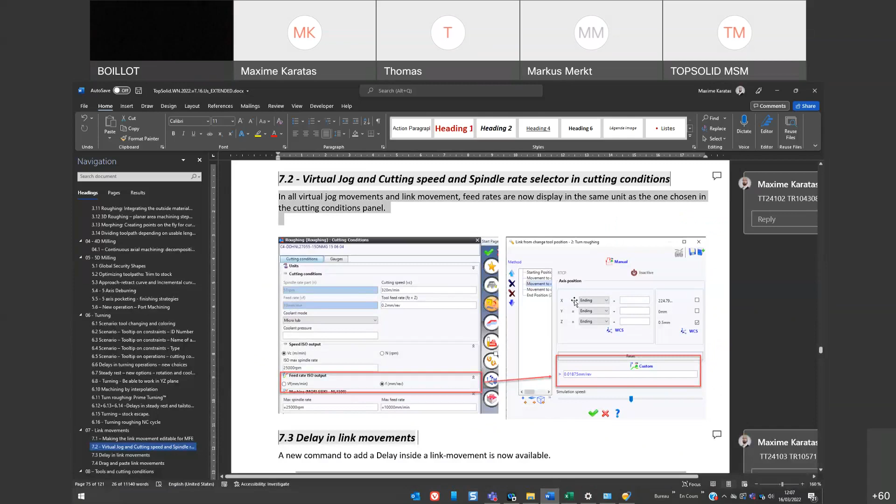Just make it, for the approach you should get this here correctly instead of having two different ways to display the feed rates, right? So basically we use the same display of feed rates in link movements and everywhere. This is why we added it to everything.

Same thing, let's go for 7.3. Let's take this one for delays. Simple, okay, can I get my machining? Yes please. When you go to link movements here, it is now possible to add a delay, simple as that.

The delay command is, I believe, in here. What was it? I lost it. It's supposed to be in here. Oh come on, I made the screenshot myself, why is it not here? Come on, is everything broken? I am using the dev version, so might have broken some stuff, but come on.

Whatever, let's proceed because we have lots to cover, but I'm gonna write this down. Why is it not available anymore? Come on, do I need an upgrade or something like that? Fine, I don't believe it, maybe, maybe that's why. Can I upgrade, please? Yes. Good, is it why I can't get it? No, okay, so we are missing something here.

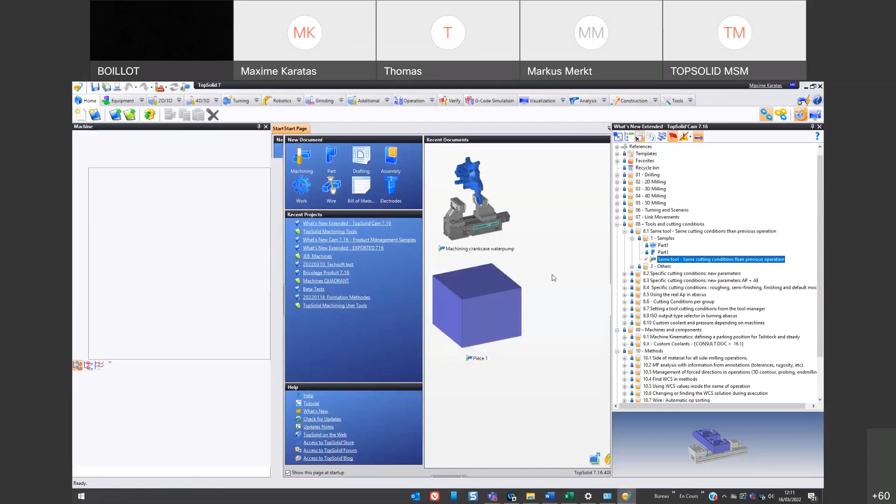Same tool, same cutting conditions. What this means is that if you have a pocketing operation and start a new one, TopSolid will try to recall the last cutting conditions used, taking them from here and applying them to the new cycle, as long as we use the same material and tool. But keep in mind this will not apply if the cutting conditions are provided by external elements, like an abacus - that will not be taken into account. We only recall speed, feed rate, and coolant.

Let's go on to specific cutting conditions. We are now able to specify a bit more. Here you see new parameters - we added coolant type and coolant pressure, now available in specific conditions. Plus we also added the AE and AP parameters that you can specify or not. To not specify, you just leave it blank or choose 0, and they will be ignored.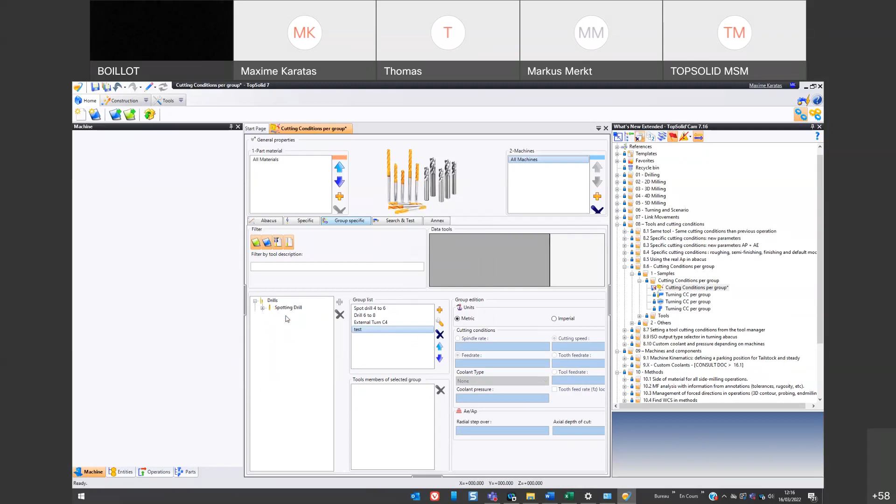In the past, you would have to create specific cutting conditions for each tool and a specific Abacus. Now you can specify for groups of tools. You have your tools here, and a group list where you can create a new group - for example, let's call it test. In there, if you want to add some tools, like these spotting drills, you can select them, and for this group you'll be able to select the cutting conditions you want to call - cutting speed, feed rate, etc. You have to choose which one you want to use, and you can lock the feed rate, etc.

When you call it, you'll call the same thing as the group. As long as you send a kind of tool on this list in the tool member section, it's no longer possible to send different ones - if I put spotting drills, I'm not able to put end mills in the group.

This is also why I'm introducing this feature. As you can see, it's been applied pretty much everywhere - now you can choose the ISO type of how you want to output the cutting conditions outside your ISO. So in your machining files, you now get this selector in cutting conditions, if you want to use Vc or N for the output. This has been done pretty much everywhere. Let's proceed.

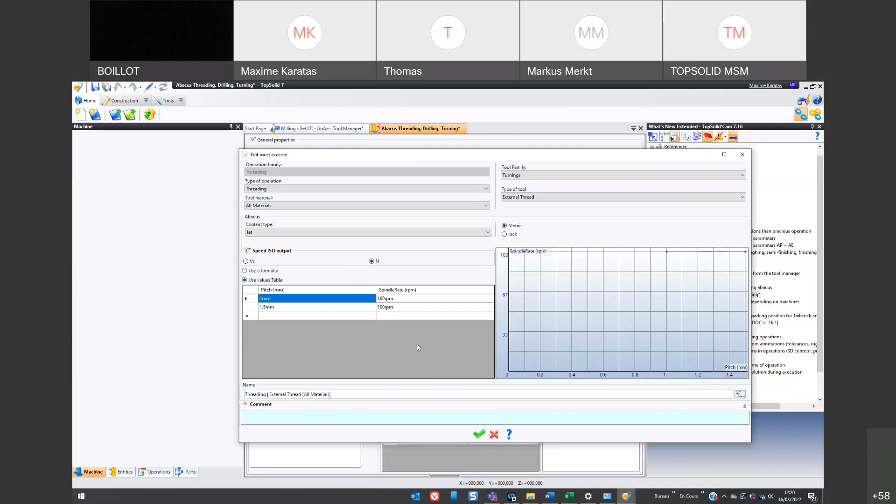I think it's written in the documentation that only the cutting speed is stored, and in fact we only do a sort of calculation in the background to get back to the spindle rate. Okay, close this too.

What happens if we had standard setting before? I believe there was something written, but I believe this won't change anything. It's just that for new cycles, you will be asked for it. I think I tried it, but this kind of case has been applied, meaning for older cycles, I believe the selector isn't selected, and we just use the default values like before.

But you can try it out, Mike. Let's proceed. But yeah, generally speaking, we try not to break previous files, even if you upgrade the file, etc.

Custom coolant pressure depending on machine. Yes, also this one - this is a big one, you could say. You can now specify a new kind of document: customize coolant and pressures, where you can combine different things.

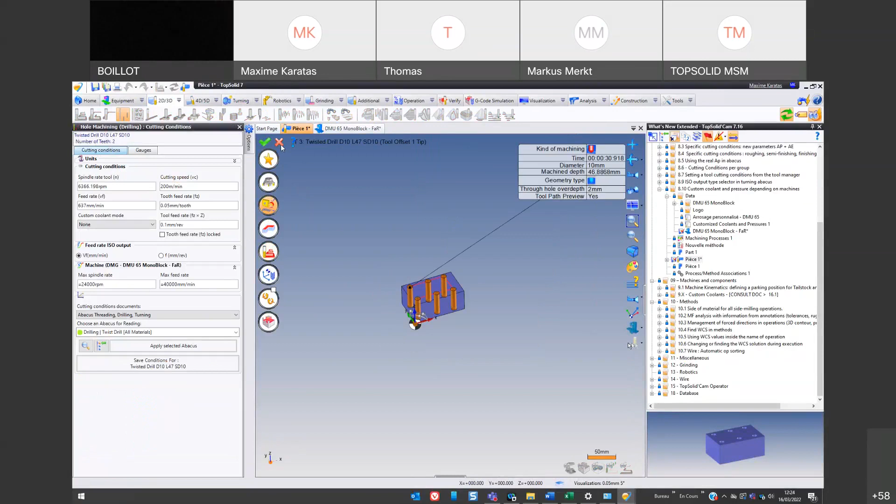Where is it? Well, I'll let you explore it, but I did put it right here. Things were done correctly - we have the custom coolant, and we also explain how you need to write things using the semicolon and stuff so as not to break everything. So it should be written correctly. I believe the documentation was done right.

One last thing here - for the restriction, I do believe we had an example, but it's no longer possible to use the custom picking, as long as you linked the document to the machine. And this is planned for 7.17.

We could redo the French screenshots, but this documentation is translated by this little guy presenting you this, and well, we have a lot to understand. This is also why we want to change the way we bring information to you, because right now this documentation depends on one person alone.

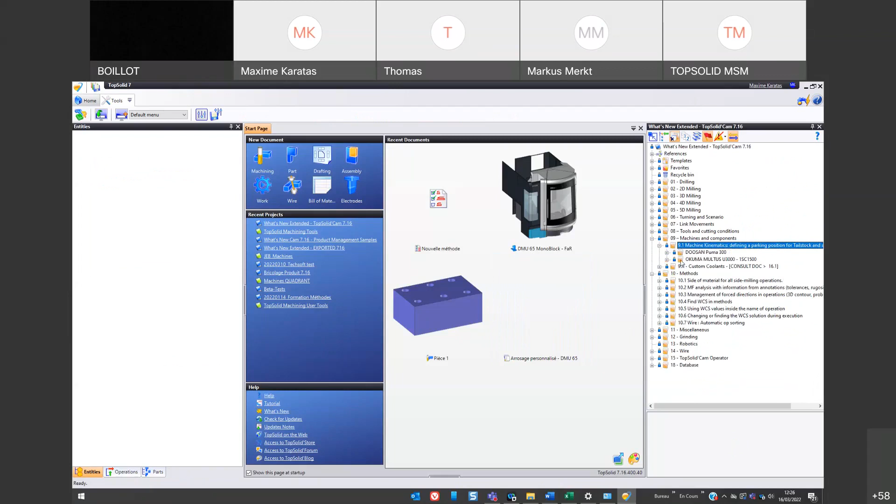We are now able to define a parking position for the tailstock. You will find it inside the tool change positions. Here you can choose, for example, your tailstock or your steady, and specify a parking area, what we could call a home position. You don't need to put this element as a tool holder, it is not required, it's just here and there. This is why maybe we need to change the function name at some point.

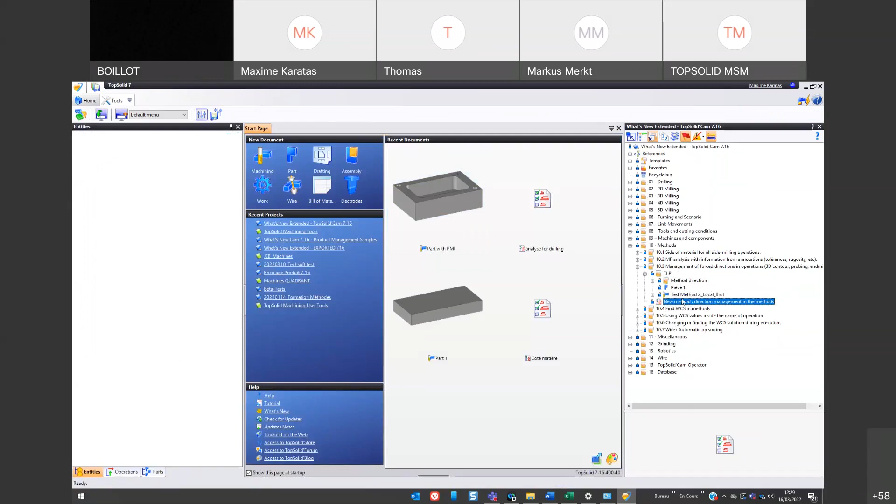Management of forced directions in operations. Let's open it, this will bring back memories. Simply put, we are able to manage the directions here, picking directions. You can pretty much use the directions things here instead of having to do it manually, or use automatic selection.

What's important is that, for example, in your facing, let's take this one. Now the directions are available inside the direction parameters. Let me take a quick example: if I filter like this and try to use here, we are able to specify what we want to use, this kind of result. So general improvement on management of directions, we are able to pick them, search them, pick a face for direction, etc. Makes sense.

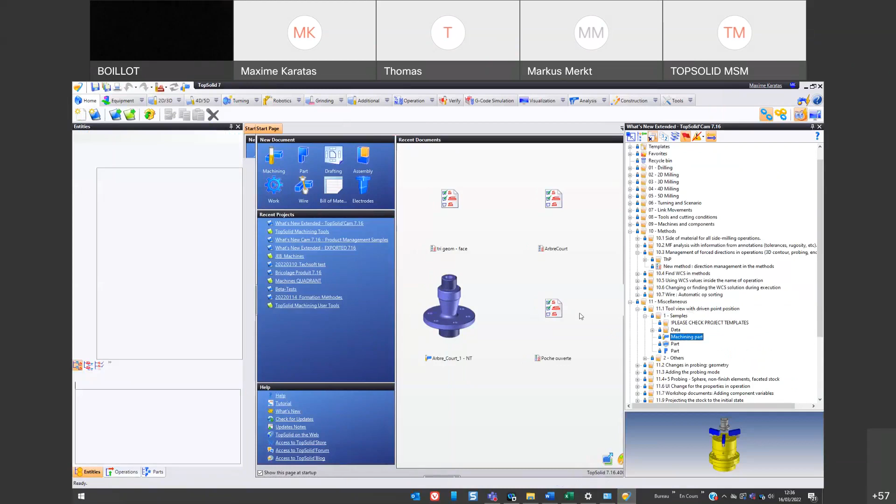Let's switch to this. Tool view with driven point position. So now, when you have this kind of part, when using the drafting, we have a specific one, and I think this is that one. We are able now to display the point that is driven. Let's take a quick look.

Inside the document, let's put a quick look in the templates. 11.1 templates, and I believe it's here. You can customize what is going on, I think it's on the maquette, no, it's this projection here. And for the detailing, I can't remember what it is. It's supposed to be in there. I let you dig into the documentation, but we are able to display the point and also change the style of points, etc. It's supposed to be here. Not sure why I couldn't access it. I needed to add a new one, so that's fine. Let's proceed.

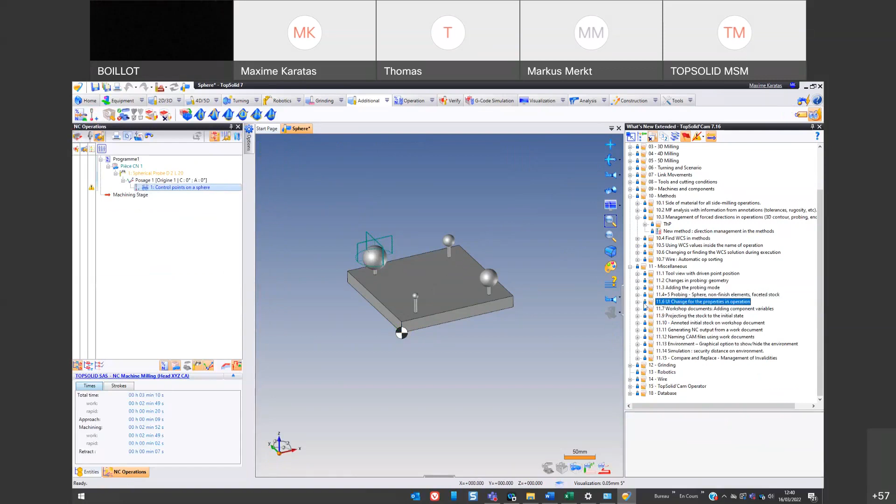I made a quick documentation on the UI change for properties in operation. Simply put, if we try to do any kind of cycle here, this has been changed. Instead of having a drop down, we created a full page with some explanation of what is going on.

Let's go back to the workshop documents. Simply put, we are now able to find or bring more details from more components inside an assembly. If you go to your properties, you'll find you can get access to assembly 1, 2, 3, 4, 5.

Same thing inside the properties of your stock. When projecting on workshop documents, you can now call the part's initial stock shape. We do have an example of this in video. You can project the initial stock shape and also bring back the dimensions of stock. These two combined can bring you the initial stock shape and also the automatic dimensions. Careful, as I said, only for block and cylinder.

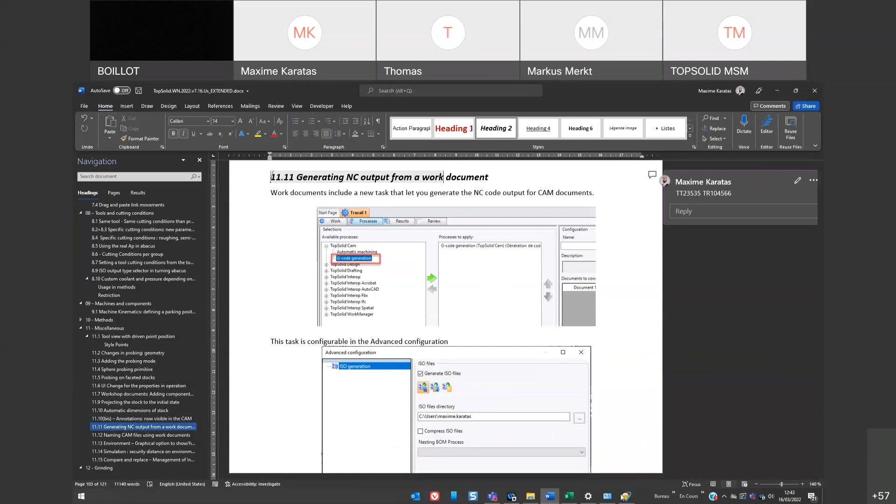Let's jump to here. Inside work documents, you are now able to change the name of your file. So where was that already?

When I go to this, work document, where was that? I can't remember. If I do some automatic machining, I believe it's here. Can I find it? Where isn't it? Where is that? Okay, whatever, I'll find it back, but you get the idea - you can name your files. It's an advanced configuration or something. Where is that? Ah yes, easy, that's here. And in there, you can choose from three different things, and you can choose how you want to do this kind of thing. No, it's not here, I don't believe it's here. Something is missing here.

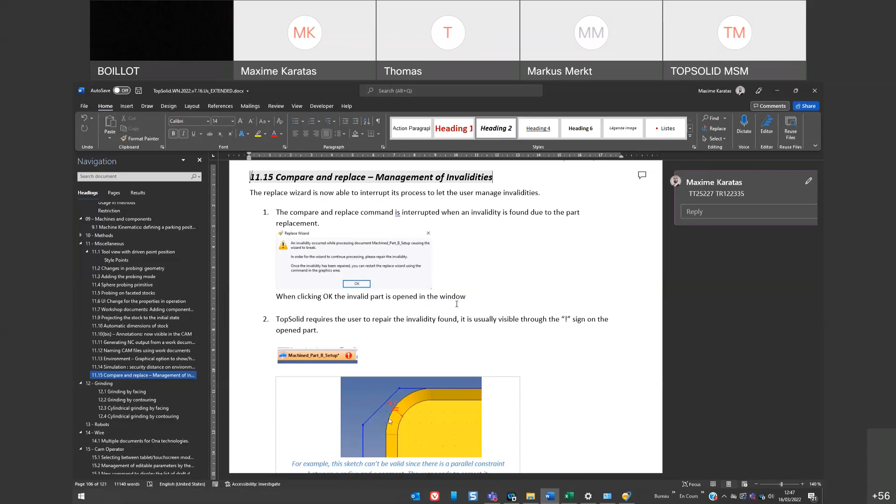Sometimes it was a bit hard to correct the invalidity in the meantime. So now the compare and replace wizard is able to interrupt the process, and you get a button on the top of the part once the invalidity has been corrected, and you can resume the replace wizard. You get a full video here showing where the management of invalidity is done, so no worries about it.

Finally, let's talk about this one here. We added some new cycles for grinding. I won't go too much into the details - we have 4 new cycles for grinding. You can find them, let's just do some stuff here.

Right click, and now you're able to find it here - you have 4 new cycles: grinding by facing, contouring, etc. For new, you have examples here, and of course it comes with new tools that you can create. So when you create here, you get these 4 specific tools for grinding.

So for this kind of thing, what is important compared to usual machining is that we can now do back and forth cycles, back and forth. When you want to get back on the same face and do spring passes, those are managed here. You can specify spring passes, do out and back, and how you want to specify your out and back, always in the same way, to alternate, etc. Pretty straightforward cycles, and we have a full 20-minute video specifying exactly what is going on with these cycles.

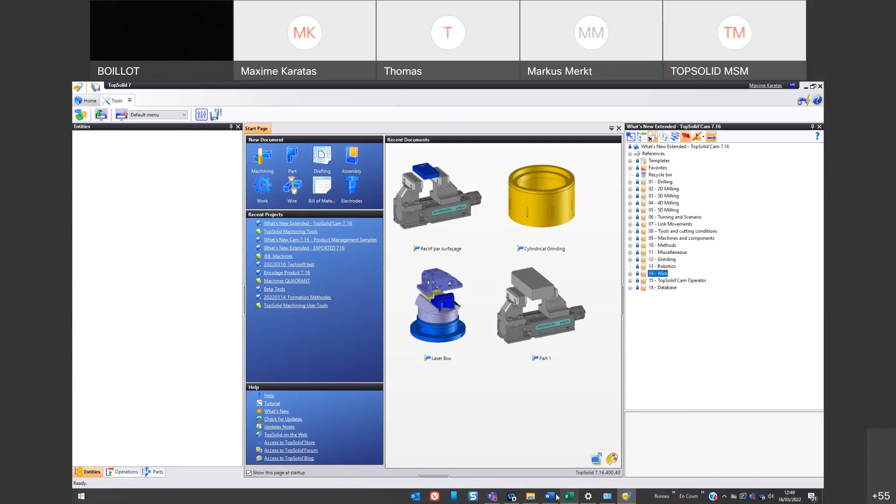Let's just take a look at these two here, and we'll jump through it. So for our wire users, simply put, you can now specify multiple technologies for ONA, and you get to choose here to have it there. So, well, best thing, try it out and see how it goes.

For CAM operator, we added some new interesting options. So of course you can now choose between tablet and touchscreen, but that's not all. We are now able to edit the parameters as the PDM admin, and say what the user has the right to modify for each kind of operation.

So you get this long menu here. You can create different users, and there you can choose which cycle can be modified, and in the cycles you can choose which parameters the user can actually change. So, pushing the admin rights a bit far.

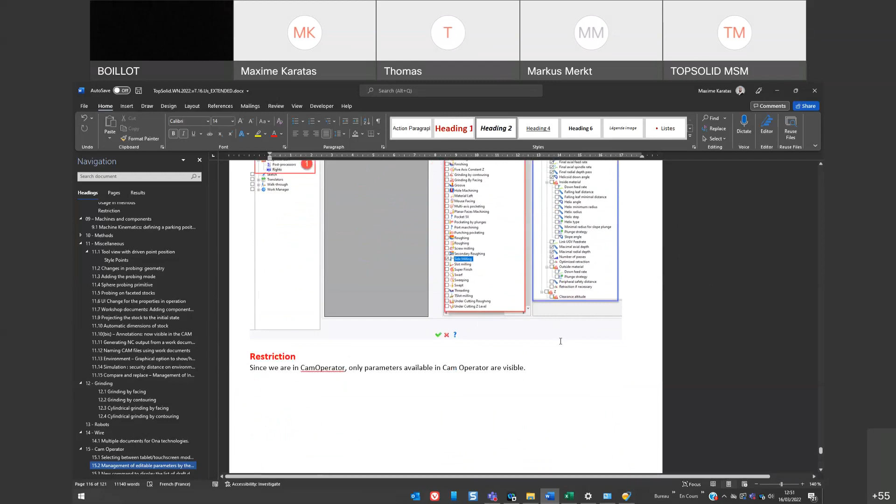Plus some new eye candy. We added a command to display the list of draft documents available on a part. So for example, if you have tool drafts, assembly drafts, etc., they are all available here. You can click and get a drop-down list with all the documents linked to this CAM document.

And finally, we just changed some of the filters here. You can get different filters for displaying the operations here. These two buttons let you choose. This is more or less the one thing you could do in TopSolid'Cam, but now available in CAM Operator. And that is all, I believe, for this thing.

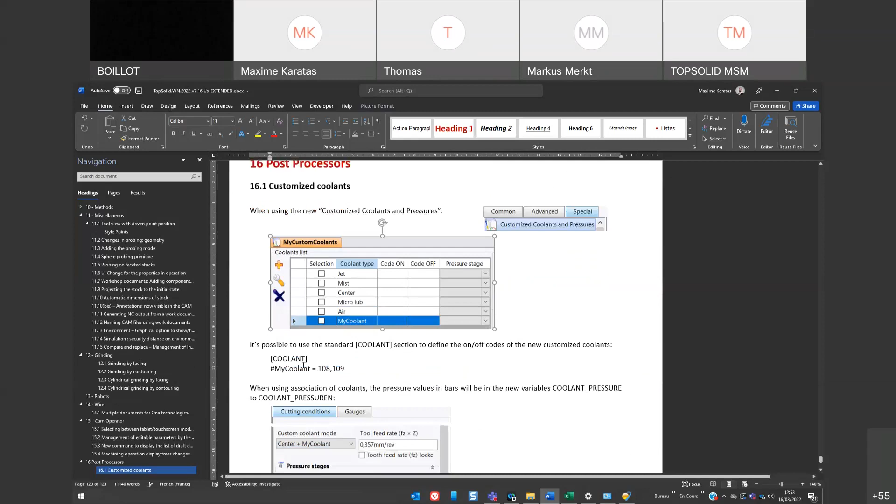Some more documentation regarding post-processing. I'll let you dig into it, but you'll get information regarding, for example, what we spoke about, the coolants - what is going on, what is implied, my coolant, how do you want to call them, coolant pressure, etc. So let you dig. And for this one here, I requested a bit more documentation and examples, because for now it is a bit limited, as you can see.